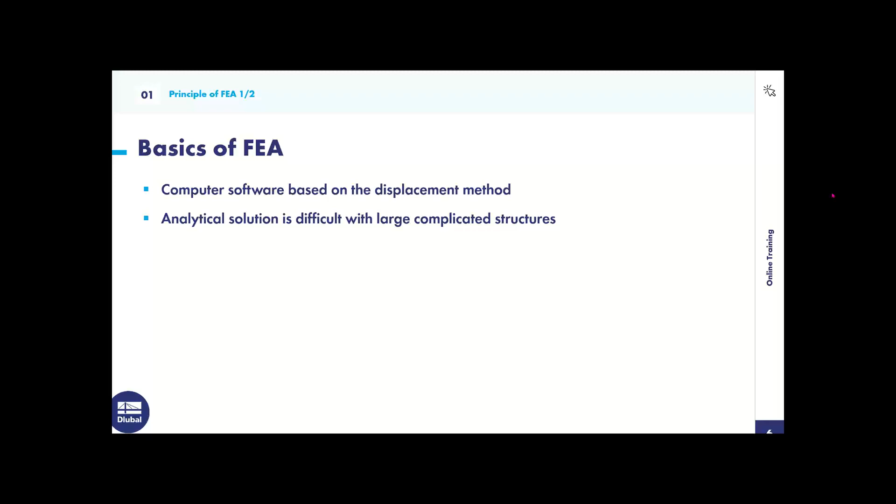So the structure within an FEA is converted to a finite interconnected element mesh, and then the material and cross-section properties are given at each finite element node. Once that's done, the mechanical behavior is transferred between these elements. A word I'd like you to walk away with is discretization. This is where the structure is being submeshed into finite elements.

So now we can go through the FEA calculation workflow. First, the local element stiffness relations are determined. Then the program changes the stiffness relation at each node to the global coordinate system. Then the entire structure is assembled. Fourth, the support conditions are implemented into the structure. Then the displacement vectors are determined. And lastly, the support forces and internal forces are determined.

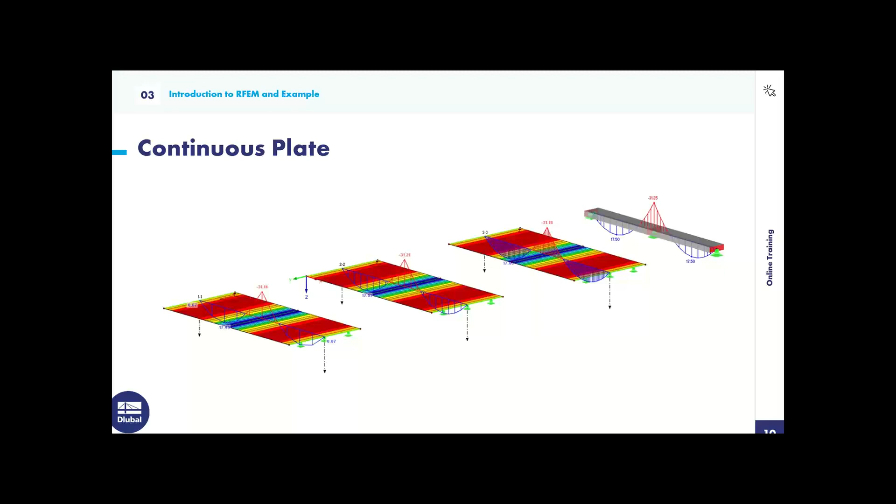So now I will just move into RFEM. One second. And now you should see RFEM. And right now I have an example up, and with this example, I will just be using this so we can go over the UI of RFEM and just the basics like tools and everything.

So to start off, RFEM is a structural analysis software capable of analyzing plates, members, and solids. Deformation, stresses, and internal forces can then be calculated for a 3D structure. So just to go over again the basic UI, the panel on the left-hand side here is called the project navigator, and this is very important for model data, and this includes all of your model data, everything that's modeled within your structure.

And for example, within this project navigator, you can expand and collapse all of these folders, such as members, and within these folders we have each member listed. This can also be done for nodes, lines, and materials, etc. And you can see when I click on any member within this expanded folder that this is synced up with your graphics window on the right-hand side here. So if you ever need to find anything, you can do it easily with that.

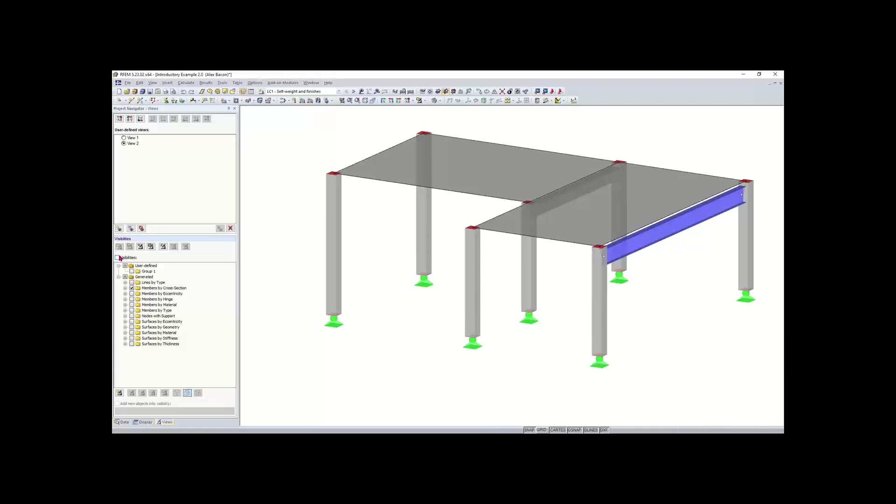Our last tab here is our views tab. So within our views tab, we can create visibilities based on these options down here. So if we turn on visibilities, we can create visibilities based on member cross-sections. So right now, if I only wanted to show my W18x50 here, I could do that. Maybe I only want to show my rectangular columns here or rectangular cross sections, my 12 by 12s. We can do that as well. And then you can also save visibilities and pull them up whenever you'd like.

The third tab we would have is our results tab. So if I just run the results for this model quickly, then we will see our results tab, and that will pop up at the bottom here only if we have results ran. So I just ran my load combination 1, and if I turn off my visibilities, now you can see in my results tab, this is again similar to the other menus where we have our expanding and collapsing folders. So right now I have global deformations checked off, and we're viewing our resultant deformations. And you can see we get a nice look at that.

And then we can also check out our member basic internal forces, as well as our basic internal forces for our surfaces, if we would like. But we'll go over more of this in detail later, so don't feel too rushed to learn this real quick. We will be going over all of this in the training. But just want to give a basic overview.

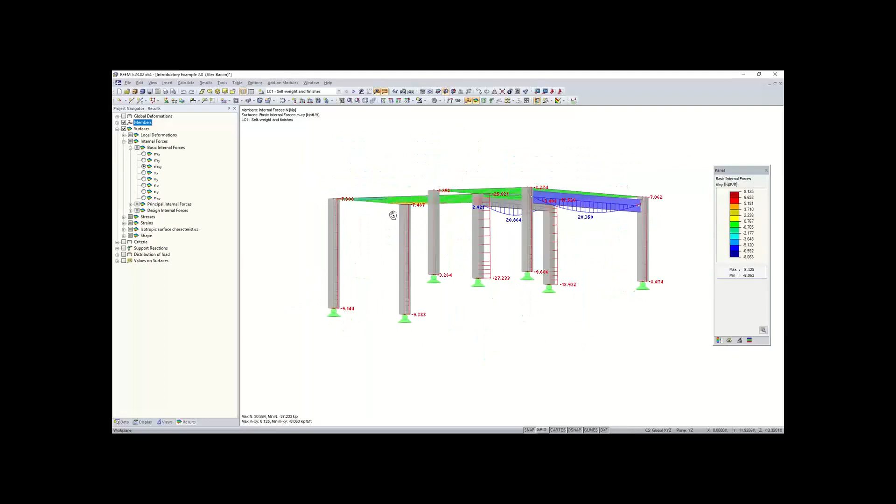Also, controls, very important. So if you like to interact with your model, if you have a scroll wheel on your mouse, you can zoom in and out with the scroll wheel. Clicking down the mouse scroll wheel will let you move the model in translation. And then holding control and clicking down the scroll wheel at the same time will allow you to rotate your model. If you don't have a scroll wheel on your mouse for some reason, you can use the arrow keys on your keyboard to move the model around in translation. You can also hold control and use the arrow keys to rotate the model as well. And then if you want to zoom in and out with the keyboard, you can use the plus and minus buttons as well.

One more thing before we get into modeling, I would like to just go over highlighting. So real quick, if you highlight from right to left, this will give you a purple box, meaning that anything that touches this purple box will be highlighted and selected. Highlighting from left to right, only things that are fully engulfed into this red box will be selected. So that's the difference between the two highlighting boxes.

So now, before we go into it, I can go back to the PowerPoint. And I just have another question to ask before we get into the model. So the question is, what is RFEM? And then the options from A to C are listed. So if you could just answer that, and I'll give you about 30 seconds to a minute.

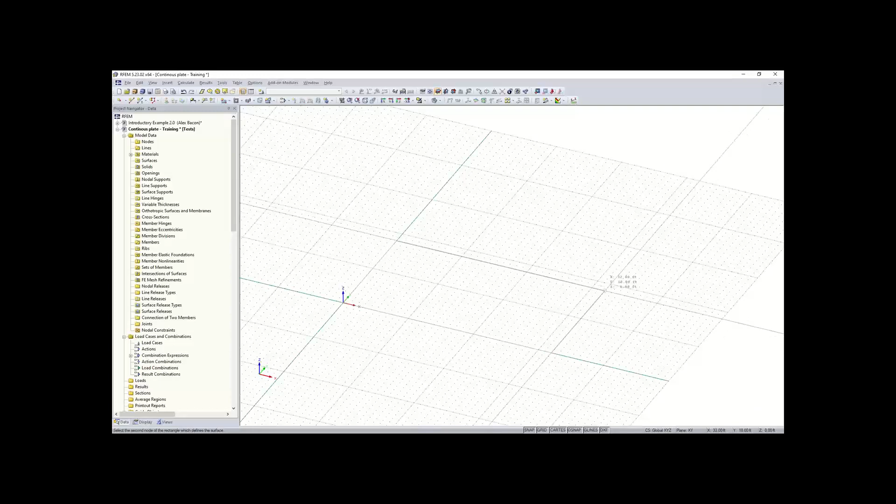Now you'll see that my cursor will turn into a reticle. And what I can do is I can just left click anywhere within this grid. You can see that the reticle snaps to these grid points here. And I can click, and then I can draw this surface here. And this surface is going to be 32 feet by 16 feet. So I'll go 32 feet in the X direction, and then 16 in the Y direction. And then I can just click, and you can see that this surface has now been created.

One thing I did want to change, so if you need to edit your surface at all, or anything that you place within RFEM, you can easily edit it by right-clicking on it and going to edit, or you can also just double-click on it. So I do need to change the thickness of this plate to 12 inches. So I can easily just do that by simply double-clicking on it, and you can also see you can change your material and other things as well. So I'll click OK.

And now we can create the same plate again above this original plate. I can just go up here to my rectangular surface tool again. I can click OK. And now I'm going to model a second plate 5 feet above this one. And then I can click and just drag my cursor, make sure that this is 16 feet wide. So that will be right there. So now we have our two plates here modeled within the XY plane. We'll go over work planes later in the training.

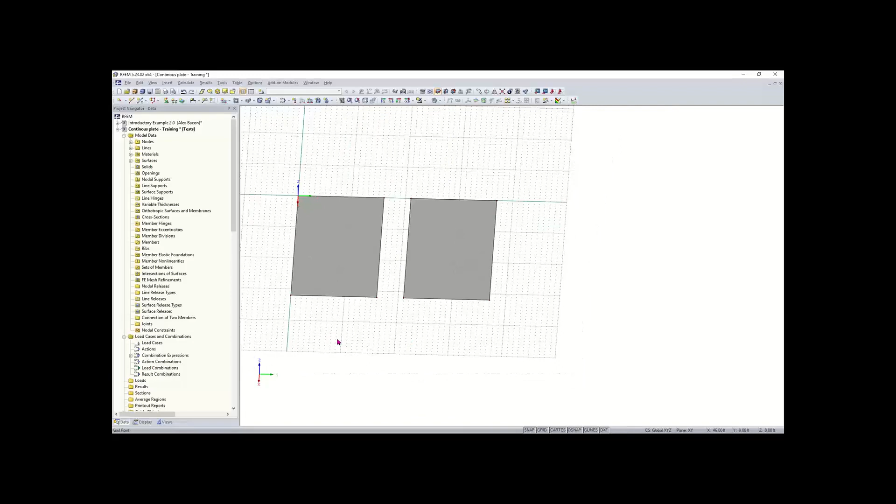So then we can simply create a third plate pretty easily. And to do this, we can use our move and copy tool. So what I can do is I can rotate here, and I can simply just highlight the second plate, and I can right click on it, and I can click move/copy. And what this will allow me to do is I can make a copy of this plate and then just move it wherever I would like using displacement vectors here. What I'm going to do is use this select 2 points and return, and this will give me a displacement vector by selecting the 2 points graphically.

So now I can just simply create one copy of this plate, and then I can create a displacement vector graphically, and I'll select my bottom corner here, and I would like this copy to be 5 feet above this plate. So I'll click that, and I'll click OK. And now you can see that the copy was made, and it was made based on that displacement vector that I selected.

So the next thing we want to do is now we can create our continuous beam. And to do that, basically we're just going to be creating our member. And you'll see that my plate is hanging off the edge of my grid. So to change the amount of grid points that you have, or to expand this grid, we can simply go up here to our tool. It's not really a tool, but our settings for our work plane. We can click on this.

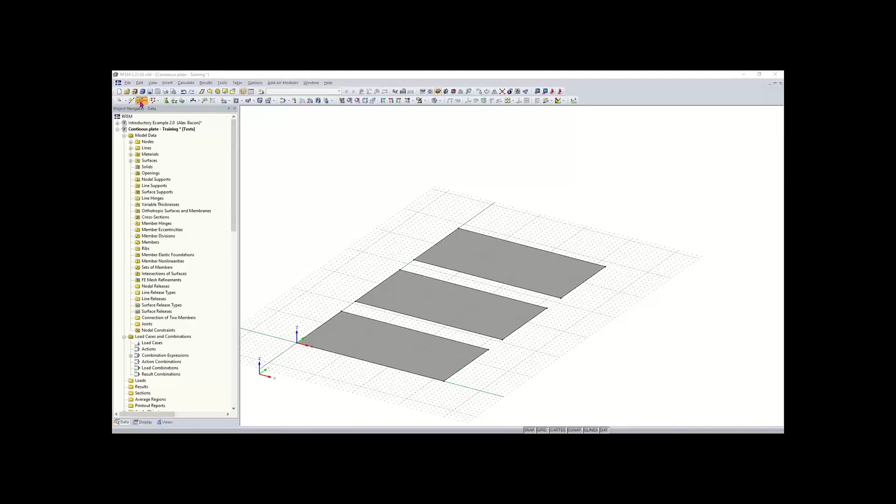And then once we click on that, we have our new member dialog box here. And we have basically a lot of information, but the one thing to focus on is just to input what our cross-section is going to look like. So we can just go over here to this button called Import from Cross-Section Library. We'll click on that.

And then this is similar to the material library, but you can see that we have our cross-sections here. We have rolled, built-up cross-sections, parametric thin-walled, parametric massive, and parametric timber cross-sections, as well as some other options down here as well. Right now, we'll just be focusing on our rolled I-sections here. Actually, my mistake. We will not be using the rolled I-sections. We're going to be using the rectangular parametric massive sections right here. So we'll click on that.

And then once I click on that, you can see that I can enter the parameters for my cross-section, like the dimensions. So I can enter what the base is going to be, which is going to be 40 inches. And then my height is going to be 12 inches. And now you can also see down here that our material is by default set to 4,000 PSI concrete. So it's also per the older ACI standard. So what I can do is click on edit, and then I can go and change it to the newest standard, change it to 4,000 PSI concrete, and everything is correct there.

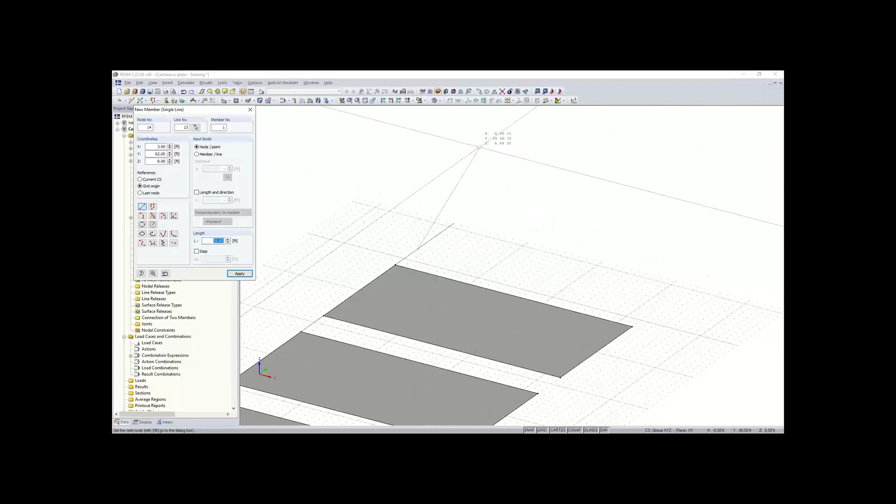And I'm going to add this beam 5 feet away from my third plate here. So I'll left click, and now you can see that I can just draw, you see this line here, I can draw my beam, and it's going to span the same length as our plates here. So I'll left click again, and now you can see that our beam has been drawn. And now we have our 3 plates in our continuous beam right here.

So the next thing we want to do is we want to divide these lines here on the edge of our plates, so we can add a midspan here for supports. We also want to divide this continuous beam, so we can add a middle support as well. So to divide the lines, we can simply just right-click on the line. And again, when you right-click anywhere or on any object, you get this shortcuts menu. So we can just right-click on this line to divide it. And then we want to go up here to divide line.

And you can see under divide line, we have multiple options for dividing a line. So we can do it by distance. And you can see when I pick that divide line option, we have these gray arrows here on your lines. And these arrows tell you the orientation of the line or the direction that you drew the line. So this would be the start, and this would be the end of the line. You can also view these arrows by just hovering over any line that you've drawn.

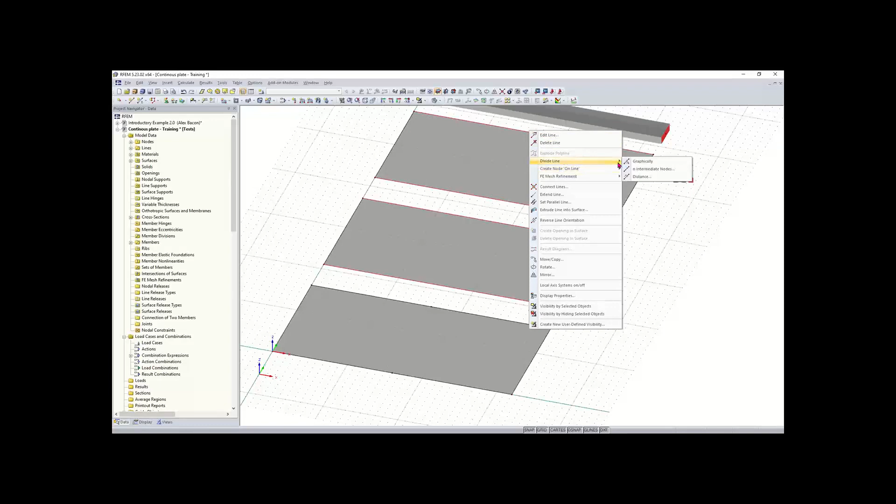Now we can do this for the rest of the lines, and we can easily just hold Control to select the rest of these lines. Right click. Holding Control while selecting options allows you to select multiple options, and we can do this by distance again. Everything's set here, you can see the multiple lines have been selected. I'll click OK, and now we have these nodes placed in the middle of our lines.

Now we'd like to divide our continuous beam up here. I can right click on the beam, go to divide member, and the first option would be graphically, which lets you select graphically where you'd like to place the node. I'm going to place it right in the middle here at 16, and now you can see that our member has been divided.

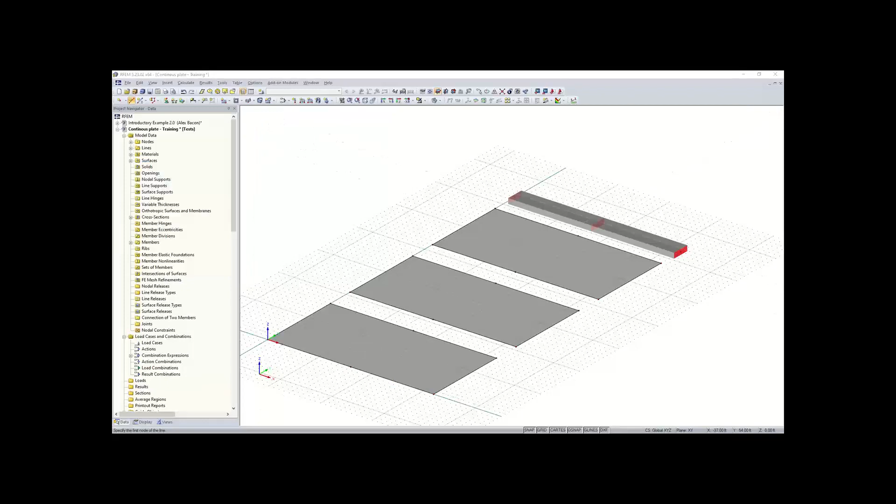I'll rotate the model to get a better view. Now that our members and lines have been divided, we can draw a line down the middle of our plates. The reason we're putting this line down is to later add a line support there, so we have some mid-span support. Let me go back - we have an option up here called New Line, right next to our New Single Member button.

I'm just going to click that. Now you can see this box opens up, and what we can do is draw our line within our work plane. I'll select snap to and select this first node here, then draw it and snap to the second node. You can see we have a nice perpendicular symbol there, letting me know the line is perpendicular. I can right click anywhere or hit escape to exit out of that tool, and now you can see that our line was drawn.

Now that this line has been placed, instead of having to redraw it, we can simply click on it and hold Control. If I click on something, hold Control, and then drag it, that'll make a copy of it. This is a great workflow for working with anything in RFEM - you can simply highlight something, hold Control, make a copy of it, and drag it and snap it anywhere. It's pretty efficient.

Now we can add in the nodal and line supports. First off, we'll add our line supports for our plates here. To do that, we can go up to New Line Support. This line support is going to have certain conditions to it, so what we can do is click on this button called Create New Line Support.

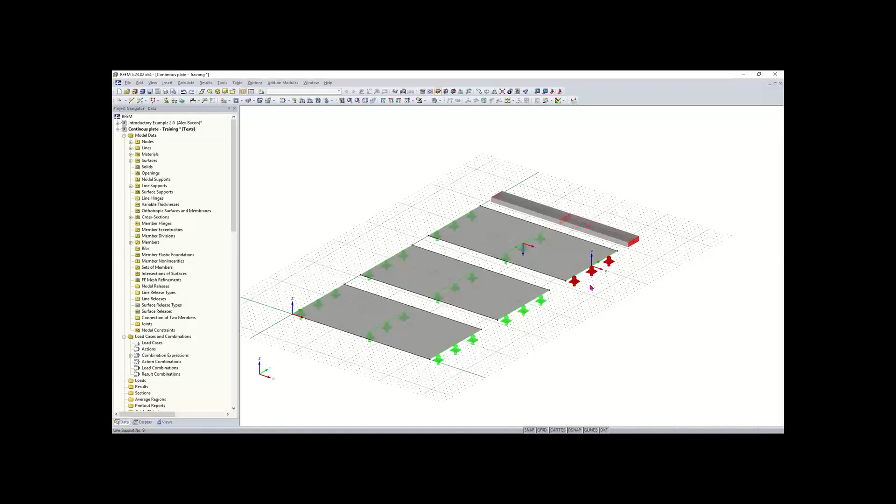Now we just need to add nodal supports to our beam. We added line supports to our plates, now we want to add just nodal supports. To do that, we can go up to New Nodal Support, and you can see by default that hinged is already selected here, so instead of having to create a new nodal support type, we have hinge selected already. We can hit OK.

Now we can select our first end node here, and then select our middle support. This last end support is going to have different conditions than these two supports, so we can go up to nodal support and create a new type of support. This support will be the same as a hinge support, but the rotation about the local x-axis will be restrained. I'll click OK again, and now you can see that support is a little different - it can't rotate about the x-axis, so it's locked. Now all of our supports are defined.

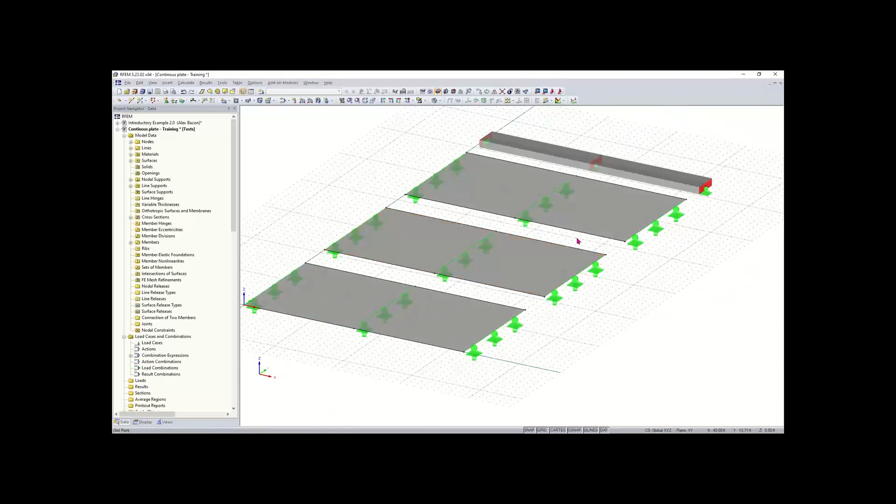So now that our supports are defined, we can get into loading. So now we would like to load these plates in this continuous beam.

It's important that we create a new load case because every load within RFEM needs to be assigned to a load case. I can go up to edit load cases and combinations, or use the New Load Case button. I'm going to click on the New Load Case button. You can see the program has automatically created a new load case for me already.

For this load case, you can add a description, and I'll just call it dead load. You can see the action category is set to dead—we don't need to worry too much about that right now. But here you can see we have an option for activating or deactivating self-weight. For this example, I'm going to deactivate self-weight. Now our load case has been defined, and we can click OK.

Now you can see up here we have our drop down telling us which load case we're under, and load cases and combinations were automatically generated based off of standards. The program has generated some load combinations and result combinations, but we don't need to worry about that right now. We just want to stay under the dead load so we can add loading to these plates and continuous beam.

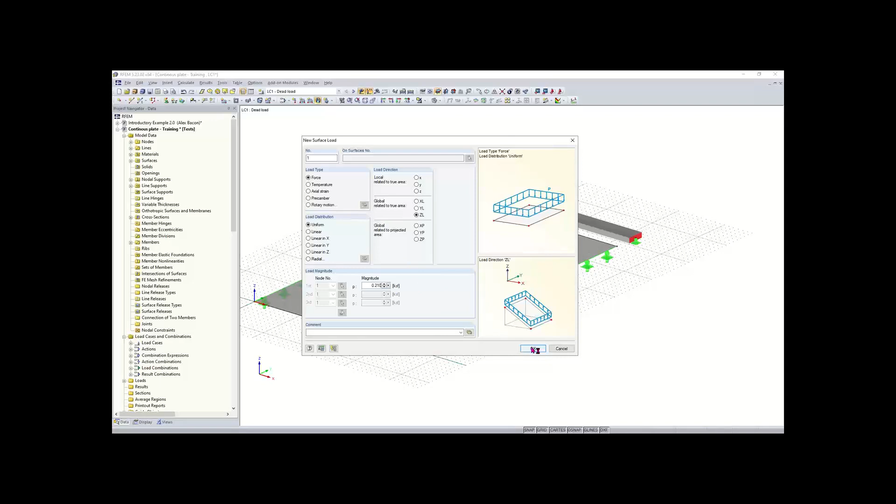Once I click OK, you can see that my cursor has changed, allowing me to select surfaces within my model. Once I click on a surface, you can see those loads are being generated onto the surface. You can also notice that my loads are pointed up in the positive Z direction.

I would like those to point down, so what I can do is simply highlight them and double click on them. Then I can add a negative sign in front of my magnitude here. Once I click OK, you can see that the loads will be shifted, or swapped.

Next we want to add a uniform load to our continuous beam here. Again, up with our tools, I want to choose a new member load. Keep in mind the member load tool is for members only, and the new line load tool you want to use only for lines, when applying loads to the perimeters of surfaces, for example. So we'll choose new member load.

Again, this is similar to the surface load, where we will have a force as the load type. This load distribution is going to be uniform, and the load direction, again, is going to be in the global Z direction.

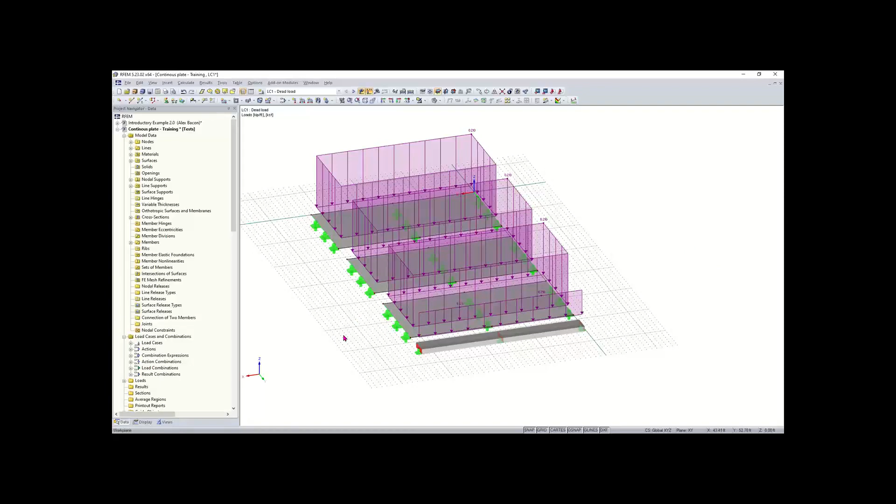If you've drawn your loads and you want to edit them, you can simply double click on them. If you double click on one, that allows you to edit just that one load. Also, if you need to highlight all of your loads or a couple at a time, you can highlight them and then double click, and that will allow you to edit them.

Great, thanks. You're welcome. Now that we have our loading, we can move on to creating FE mesh refinements. Within the program, for surface elements an FE mesh is generated, and right now our FE mesh is set to about 1 foot for the length of our finite elements. We'll get into more detail on that later if you're a little confused.

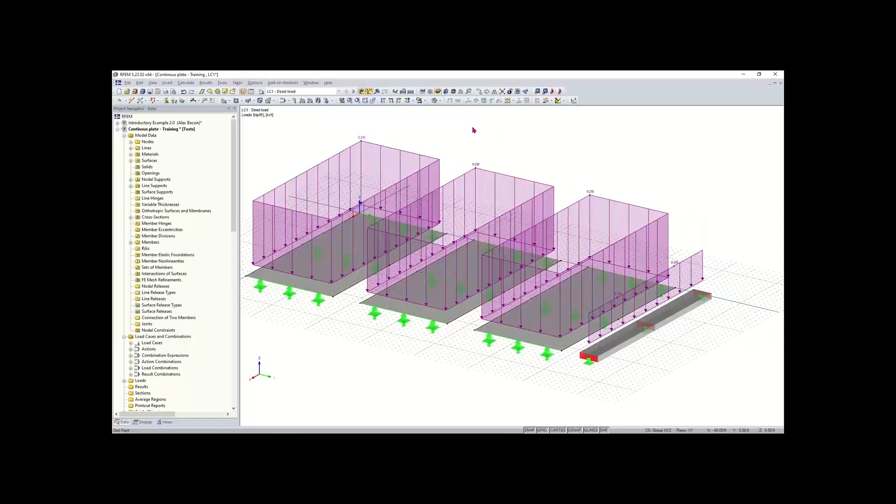For now, we'd just like to add an FE mesh refinement, which allows us to change how fine our FE mesh is going to be for individual surfaces. To do this, I can right click on my surface here, go to FE mesh refinement, and then click on new. I'll create a new FE mesh refinement using this button called create new FE mesh refinement. You can see surface 1 is selected, so I'll click on that.

Right now we just have surface selected, automatically done by the program, and we can set our target FE mesh length. I want to set mine to 0.2 feet. This is smaller than the 1 foot default selected globally in the program, so I'll click OK, then OK again. Now you can see this icon here telling us that an FE mesh has been applied.

Now we want to do the same thing for our other two surfaces. We can right click on the surface and add one, but we can also go into our project navigator on the left hand side, scroll down to FE mesh refinements, and expand that. You can see we have one for surface 1. I can right click on FE mesh refinements and click new FE mesh refinement.

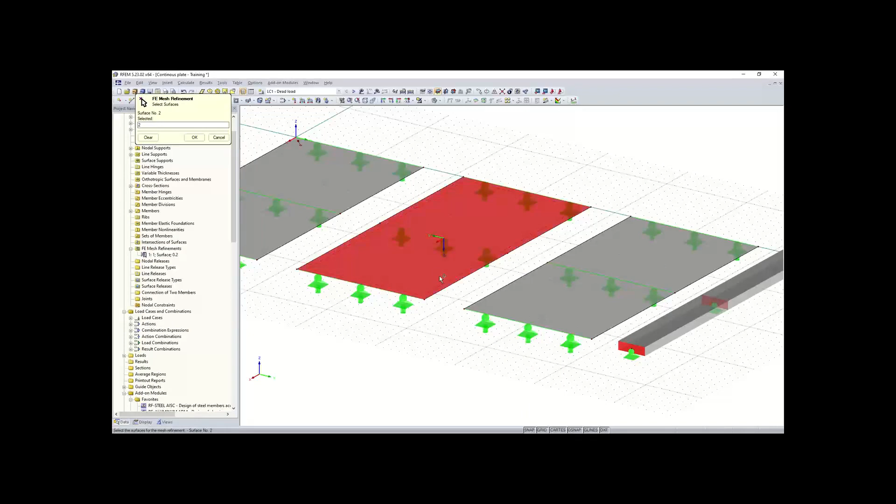For this surface, I just want to increase the FE mesh refinement so we can get an idea and compare results later to see how results change depending on FE mesh length. I'll click OK, and again we get that icon. Then I'll do the same for this third surface - right click on it, create a new FE mesh refinement, and make this 0.6 feet, so you'll see they'll be increasing down the line. I'll click OK again, and you can see that icon has been placed there.

We have another quick question unrelated to the FE mesh, which maybe you can address quickly. One of the attendees noticed that you selected concrete for one of the materials. They're wondering, what does the RF concrete add-on module do then? How is the add-on module different, I suppose, from RFEM?

So basically the material for concrete has been selected with RFEM here. You'll see later on when I run results that in RFEM you just get things like global deformations, internal forces, support reactions, etc. But if you want to design rebar for your slab here for reinforcement, that's when RF concrete members or RF concrete surfaces would come in. We have two different modules, one for surfaces and one for members. So basically the add-on module is for designing the reinforcement.

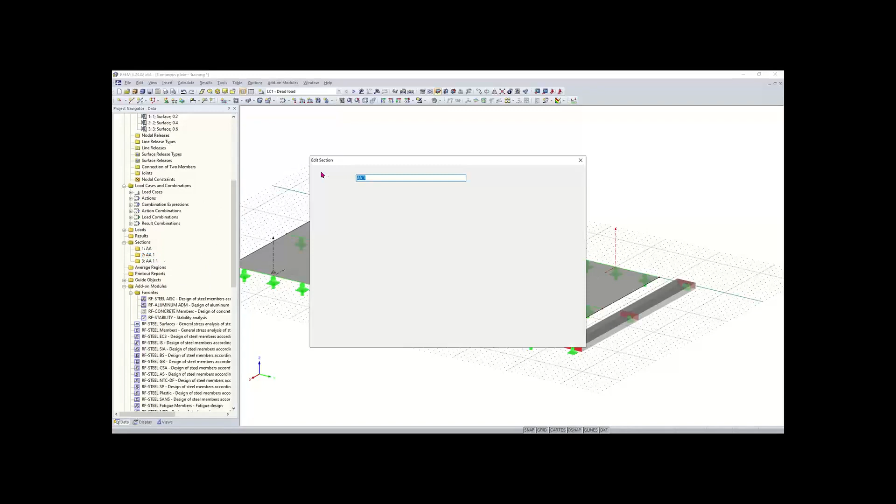You can change the section name if you do that within the project navigator by going over here to sections, and then you can simply edit a section and rename it. I'll make this one AC, and then my other section will be AB. Yeah, so click OK, and now everything is basically ready for calculation.

So we have our surfaces and members along with our supports and loading. So again, you can turn off the loading, like I don't have mine shown right now, but you can turn on and off the loading up here with this button. I'll turn it off for now. And now we can go up here to our toolbar and we can click on this button called Calculate All.

So once we hit Calculate All, the program will go through and run the calculations. It should only take about a minute or two. It all depends on the size of your model and the complexities. And then once this runs, the first thing we should see is our global deformations, and those should be shown. And then we can get an idea of our internal forces and things like support reactions. So now you can see that we have our global deformation shown right now.

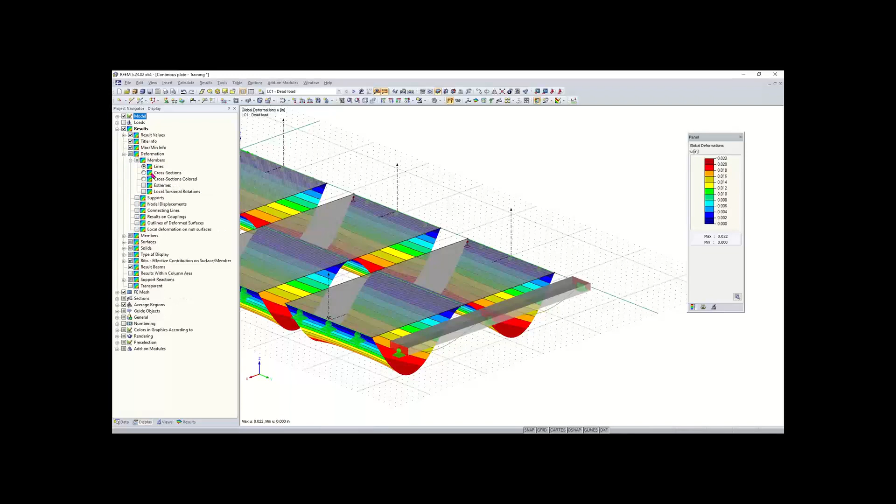But if we wanted to have a colored cross-section for this deformation, we could go to Display, and then we could go to Results, Deformations, Members, and we could select cross-sections colored. So now we get a nice color section here. We can also take a look at our member internal forces. So I can check member, and now I can just look at my axial forces. Right now we don't have any. I can get a look at our moments, and we can get a nice moment diagram there.

And we can also take a look at our internal forces of our surfaces. So we can view the basic internal moments along the x-axis. And again, like I said, every element has a local axis, and this is referred to with the lowercase coordinate here.

So if I hover over any element, it'll give me the local axes for the plate. Also, if we want to see the local axes of our member here, we can right click on that and click on local axes, and now we will get that for all of our elements here. So I can right click again.

Quick question. One of the attendees is asking how to find the optimal mesh for the analysis. Yeah, okay. So the optimal FE mesh for analysis, it's a little tricky. There's not an actual specific length that you would pick for your FE mesh for a certain model. So basically what you can do is adjust the FE mesh by going up here to calculate, and you can go to FE mesh settings.

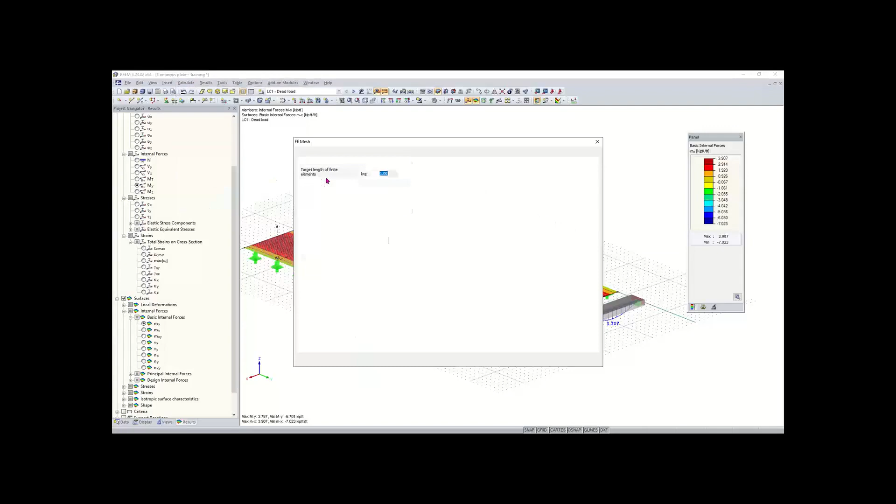And this is the global FE mesh settings for your model. And here we have our target length of finite elements, and you can change this. So basically finding the correct FE mesh is just a guess and check. You can take a look graphically if you zoom into your model at the FE mesh and just make sure it looks good.

But then also you can run the results of your model with a certain FE mesh length, and then you can change the FE mesh length or make it finer, and then run your results again and compare those results and see how much they've changed. And you can just keep doing that until your results don't change, or the difference between your results is small.

Yeah, I think exactly as Alex had mentioned, it's basically just running a trial type process where you continue to decrease the FE mesh. If your results are changing significantly, then you know your FE mesh is not refined enough. The other thing I wanted to point out, Alex, if you can go to calculate, FE mesh settings again. The third tab is called adaptive mesh refinement.

This is something that we're not going to get into today, but essentially the program will run that testing process for you. So here you can set the number of iterations, the load case or combination to consider, and the program will run a quick analysis in the background, check the results, and then it will refine the FE mesh in certain areas of the model, and it will essentially create the FE mesh that is optimal for your model. So this is a way to automatically do it. To manually do it is exactly as Alex had mentioned.

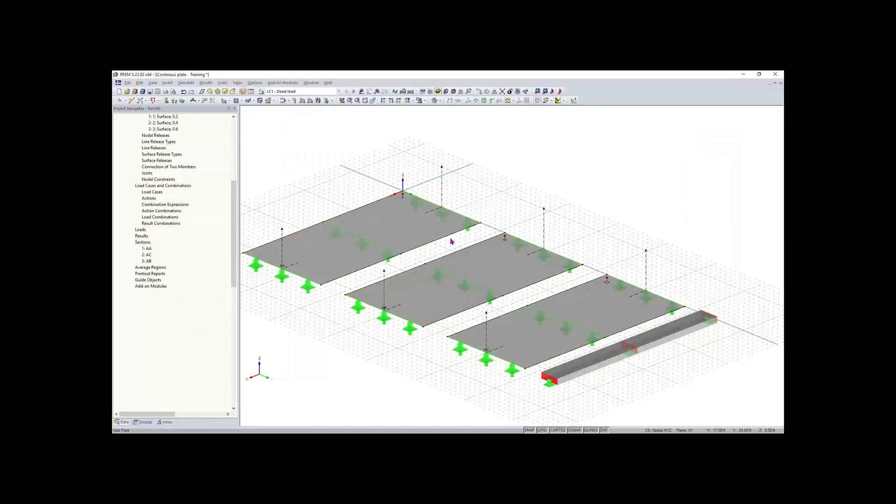So once this is done, we will have to click OK, and it's going to say that this action is going to require me to delete my results. Do I want to continue? I'll hit yes. And now I can rotate my model again. And once I've done that, it's going to make me recalculate.

And once I recalculate, you'll see that the results are going to change just a little bit, mostly the bending moments, because instead of RFEM taking into consideration shear stiffness, it's just going to assume an infinite rigid stiffness for the shear. And I'll get into that in a little bit.

So basically, this is because the methods used in school assume an infinite shear stiffness, when in reality there are some shear deformations for bending. So just keep this in mind when comparing hand calculations of deformations with RFEM.

So now back to the PowerPoint, we can go over some plate theory. So let's go over the plate theory. These first theories are going to be analogies for beam elements. The first theory is Bernoulli's, and the second theory is the Timoshenko theory.

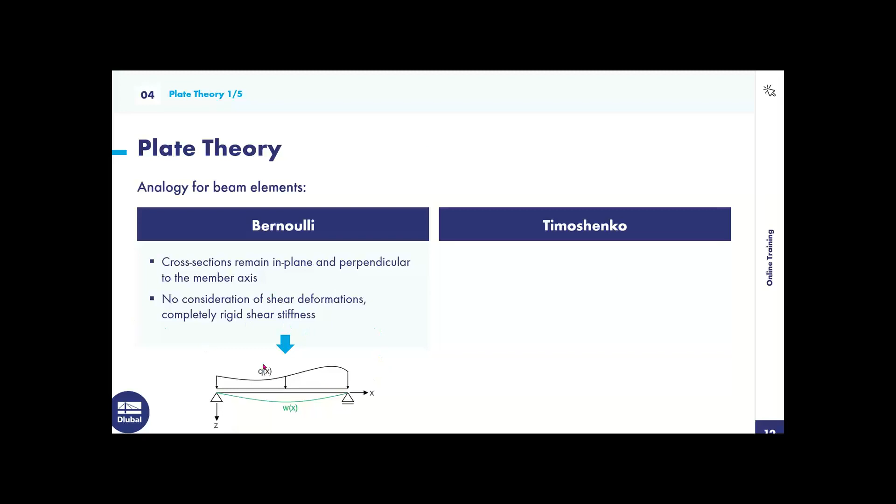The assumptions made for Bernoulli's are that the cross sections always remain in plane and are perpendicular to the member axes. The second assumption is that there is no consideration of shear deformations, and that the shear stiffness is completely rigid for our member.

With the Timoshenko theory, similar to Bernoulli's, we assume that the cross sections remain in plane and are perpendicular to the member axes. But we assume that the shear deformations are taken into consideration and shear stiffness is limited and isn't completely rigid. So this is the more realistic theory, and this is the one that you might use in school.

So now I just want to show a graphic to represent what I just mentioned. Here you have Bernoulli's, and you can see the deformation is perpendicular to the member axes. And for the Timoshenko theory, we have an additional angle, and that comes with additional deformation, due to the additional shear deformations or shear stiffness that is taken into consideration.

So these two theories we can apply to plate theories. As an equivalent analogy for plate elements, we have the Kirchhoff theory and the Reissner-Mindlin theory. The assumptions for Kirchhoff are similar to Bernoulli's theory, but for plates. And the theory similar to the Timoshenko theory is the Reissner-Mindlin.

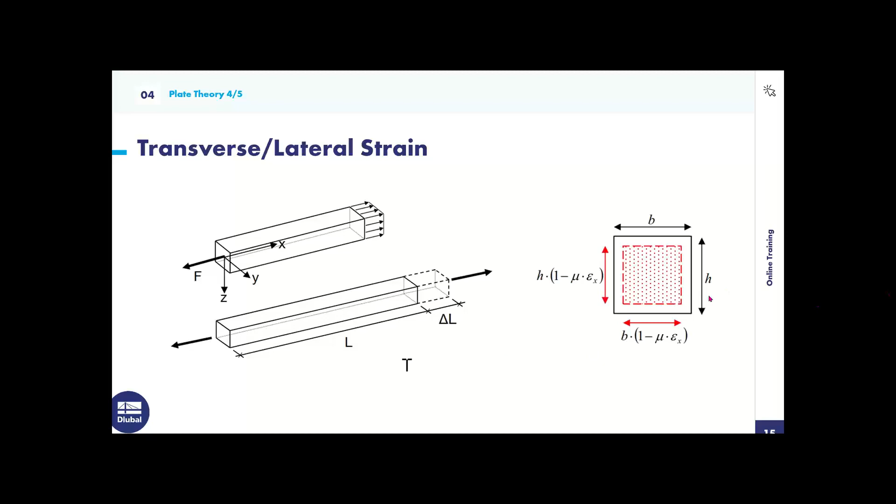So basically, the factor mu here is what takes this into consideration for our height and width. And just to summarize, for the Kirchhoff theory and Reissner-Mindlin theory, Kirchhoff normally yields great results when very thin plates are used, for example, concrete slabs. You also have to keep in mind that this only considers pure bending load-bearing capacity, and this is just basically a simplified

approach. For Reissner-Mindlin theory, the considerations for shear deformations are there, and this is better for thick plates, and also shear influence from components is relatively high. There's also a significant error when neglecting shear forces, and this is just better for more accurate shear forces and is a higher value approach. In my opinion, the Reissner-Mindlin theory is what you should be using most of the time, but I just think it's good to know the difference between these two theories.

So now what we can do is move back to the program. Within the program, we can go to calculation parameters. And once we open up calculation parameters, you will see that under options here, the plate bending theory is by default set to Mindlin. So this theory, like I said in the PowerPoint, takes into consideration shear deformations. So we can just keep that the same, or we can also change it and get a view of how the results change.

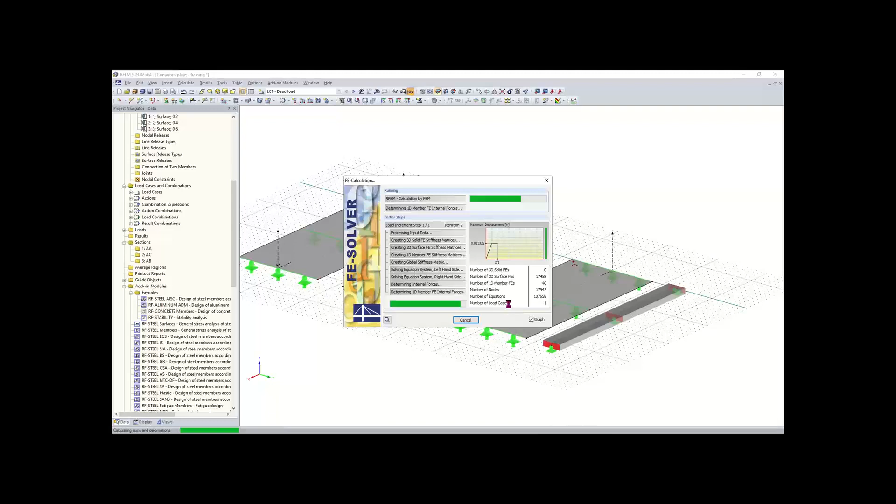Alex, we have a quick question. Yeah, maybe while we're waiting for this calculation to run. Okay. We have a user that says, is it possible to change the units of the values in the results? Yeah, it is. So that's something I should have mentioned in the beginning. You can change the units of your results, and the units in general, by going up here to options, then to units and decimal places, and this dialog box will pop up, and within here you can change the units of pretty much any result.

So up here you have tabs and you can go to results, and then here you have deformations. You can change the units of your internal forces here. You have a drop down, you can change between any of these units if you like. You can also change your decimal places as well. And if you want to change between imperial and metric, you can do that at any time throughout your modeling as well.

So those results ran, and maybe you can remember a little bit from the results before, but you can see that they've changed slightly, maybe by 0.1 or 0.2 kip per feet.

And so now that we ran that, we can also move on to another question. I'm going to go back to the PowerPoint, and I would just like to give a quick question. One second. So now this question should pop up in the PowerPoint. You can enter your answer in the chat. And I'll again give another 30 seconds to a minute for that.

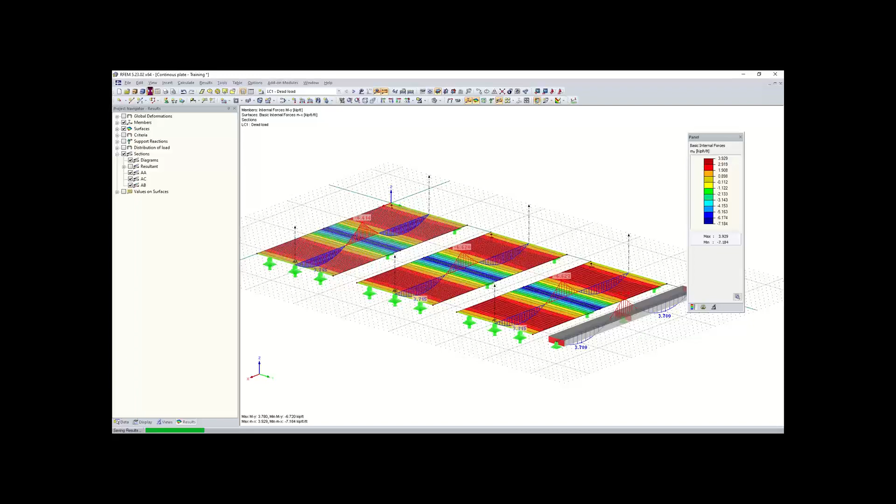So what we can do is we can open up a new model. We can also save our model for our continuous plate by hitting the Save Model button up here. And that'll save our model. And now what I can do is I can click on New Model.

And within this new model general data tab, like I said before, we can just type in our model name. So I'll just name this one Euler case 1 example training. We don't have to add a description. We don't really need to generate combinations automatically. So it'll also be a 3D model, and everything here is set by default, so that's good. So we'll click OK. And now we have our blank workspace here.

So what we're going to do is just create one single member, and this is just going to have a new cross section. So what I can do is go up here to new single member. I can click on that, and now I can create my cross section here again. So I can go to import from cross section library. And then it's going to be an I section. So I'm going to click on I section.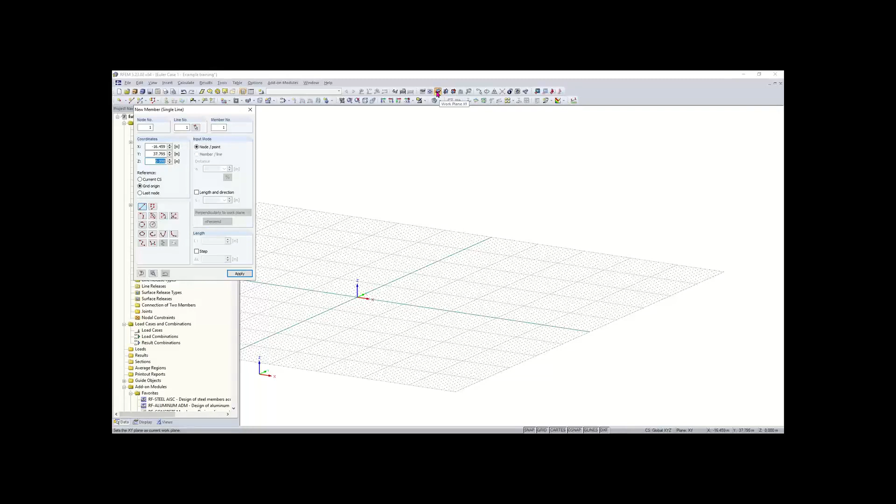And now I can draw my member. So maybe I want to draw my member perpendicular to this grid here. What I can do is I can check off this box here called length and direction, and I can set this perpendicular to work plane if I want to draw it perpendicularly. Or what I can also do is just change my work plane up here using these buttons. So right now it's set to work plane in the X and Y plane. I can change my work plane to the YZ plane, or I can change it to the XZ plane.

I'll keep it on the XZ plane, and now I can just select my origin here by left clicking, and I want this column to be 30 feet high. So what I can do is simply just go up here, left click, and now my column has been drawn. I can right click to cancel out of this, and now our column has been drawn.

So now the next thing we want to do is just add in a rigid support. So I can highlight from left to right this node here. I can go up to nodal support, and right now it's set to hinged. Instead of having to define a rigid support, what I can do is just hit this drop down and select rigid, and you can see that all of the degrees of freedom here from translation and rotation are all fixed with these check marks. So now I can click OK, and I can zoom in here and you can see that my rigid support has been added.

And now our Euler case 1 has been created. And what I can do is create a new load case for it. So because I need to add in loading, I can go up here to new load case.

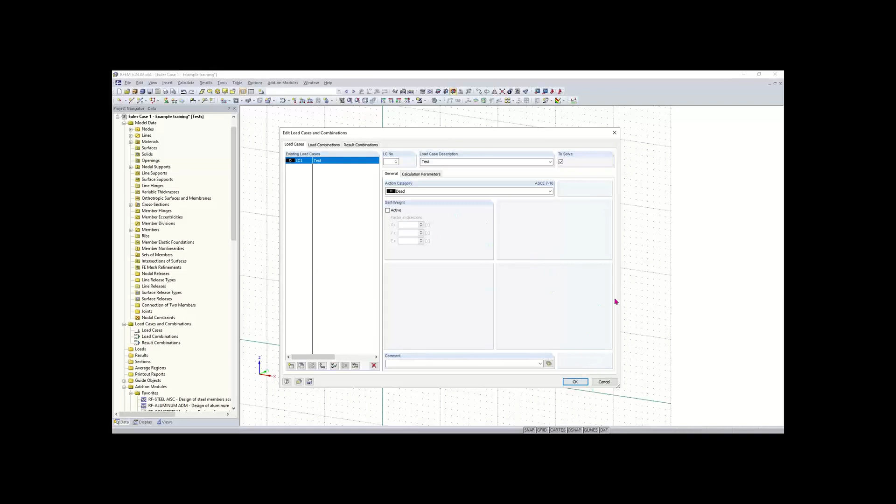I can just name this load case test, and the action category is set to dead. Again, we're going to deactivate self-weight just for hand calc reasons. Normally you want to keep self-weight activated at all times for design. So we'll click OK.

Now we can create our new nodal load. To add a nodal load instead of a member load or surface load, we have a button here called new nodal load. We can click on that.

This box should look pretty simple. We have our node selected up here, and then we just want to tell the program the force and what direction it's going to be in. It also looks like I'm still in metric, I have kilonewtons, so let's change that down here in this units button at the bottom.

I'm going to just change this back to imperial. I'll click OK. Oh, it's asking me. Yep.

For this load, we're going to add in a -5 kips in the z direction. You can see that loading has been shown here in the graphic. And then also I want a lateral load in the x direction of 2 kips. So we'll add that. We'll click OK.

It looks like I had my node down here selected before I went into my tool up here. So what I can do is double click on this loading and change the node. Or I cannot change the node there, so what I can do is just drag this loading to this top node here, and there we go.

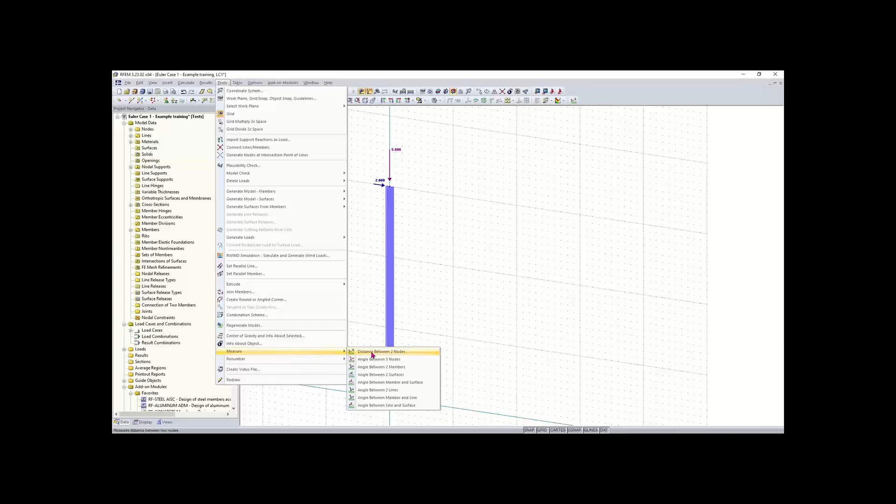Now that our loading is on the top of our column, I also want to make sure that my column is still 30 feet tall. So what I can do is go up to Tools, and I can go to Measure, Distance between 2 nodes. I can click on these 2 nodes. Yep, so it's 30 feet tall.

I'll click OK. And now, so yeah, now what I want to show you is something important. This is very important for calculations of structures within RFEM. What I can do is click on Calculate All, and I can run the calculation for this column.

Now you'll see that my deformation is shown here, my resultant deformation. I can also go here to member and again show my internal forces. I can show my moment about the local y-axis here. I can get an elevation view of that.

So also when you look at, we can take a look at our deformation in the x direction, 3.782 inches. And now I just want to show you how this linear or first order calculation differs from a second order calculation.

Just to clarify on that, if I go to edit load cases/combinations, and we're looking at this load case that we've just put loading on and created, if I go over here to my calculation parameters, you can see we get our method of analysis right here. Generally, load cases are calculated based on a first order analysis, and load combinations, which we didn't get into, are calculated based on a second order analysis.

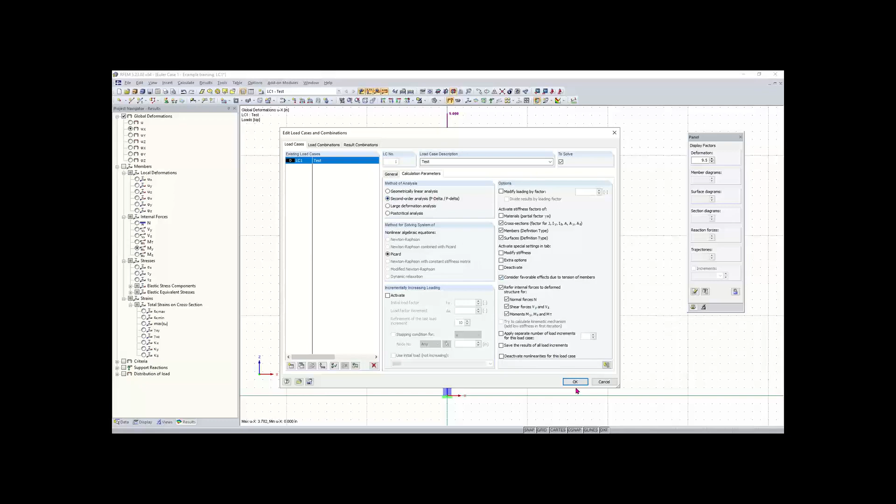So basically, a first order analysis defines the equilibrium of the beam based on the undeformed system. And the second order analysis bases the equilibrium on the deformed system, so that the deformation and bending moment is going to be increased because of the larger deformation.

So if I do that and then I click on calculate all, you should see that the deformation has increased from 3.7 to 3.9 inches. And also our moment here at the bottom has increased from about 60 kip feet to 61.6 kip feet. This is because of the P delta effect. Since the deformation has increased, the applied axial load has an increased moment arm, giving us a larger moment here.

Keep in mind you will get two different results with these different analyses. One note also, members in RFEM, like this one, are determined to be a beam or column internally based on how the loads are applied. In this case, we have a column because the majority of the forces applied are axial.

Let's quickly go over member types. If I double click on my member here, you can see the member type is set to beam, which takes into account beam or column. We also have rigid for infinitely rigid stiffnesses, and we have ribs and truss members, but we won't get into those types today - just good to know. If you're designing or drawing a beam or column, always keep the member type as beam.

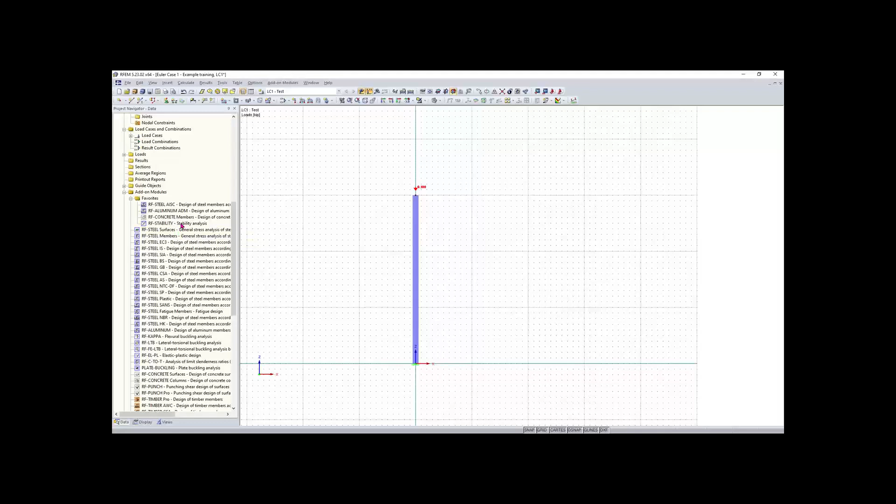Now that I decreased the loading on our column, we can go into our RF stability add-on module, which all students have access to. I can go down here to add-on modules - you'll probably have a long list, and I've favorited the ones I use most frequently. If you're having trouble finding the RF stability analysis add-on module, go to add-on modules, then others, then stability, then RF stability.

All of the add-on modules look pretty similar to this - basically just a dialog box. Within this dialog box, it takes all the data from RFEM, such as materials, cross-sections, members, everything - you don't have to worry about redrawing or modeling anything. This add-on module, RF stability, is very useful. RF stability uses eigenvalues and different eigenforms to perform a stability analysis - just some background information.

Euler was a mathematician who came up with different cases to show the critical factor along with the critical load and lengths for a structure - this is something every stability analysis does. In order to get the different buckling cases, I'll simply deactivate the minimum initial pre-stress for cables and members. It's also important that we activate the division for straight members, which is already checked by default, so I'll keep that checked.

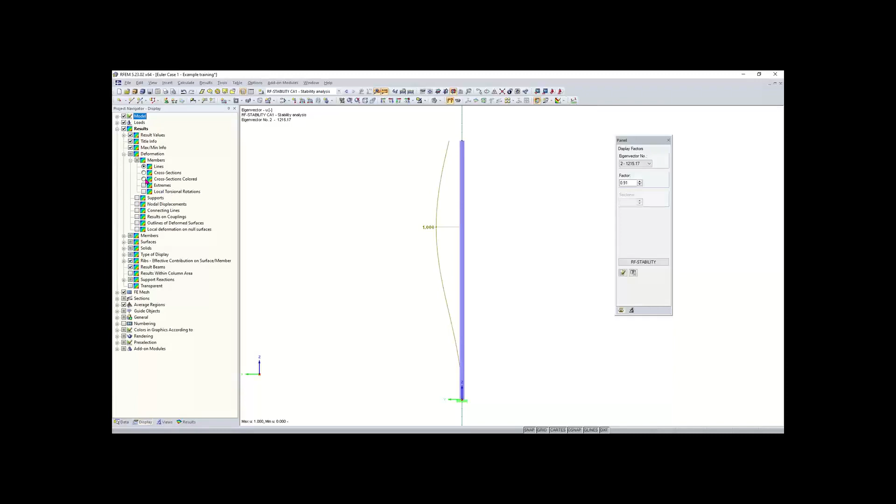And what I can also do is go to display, select color cross sections, and this gives you a better idea of the deformations. Then I can cycle through those different eigenvector numbers, which gives us a better look at the first buckling case or buckling form.

I think it's also clear that the column will first be unstable in the weak axis direction. So basically the axis of this column is in the y direction, or about the local z axis. What I can do for clarification is just turn on my local z axis. This is because the smallest moment of inertia is in the y direction, or about the local z axis.

To double check that, I can double click and go to info about cross section, and you'll see that my smallest moment of inertia here is about my z axis, 24.5 inches, which gives us our weak axis. Now we can jump back to our stability by simply clicking on our stability here.

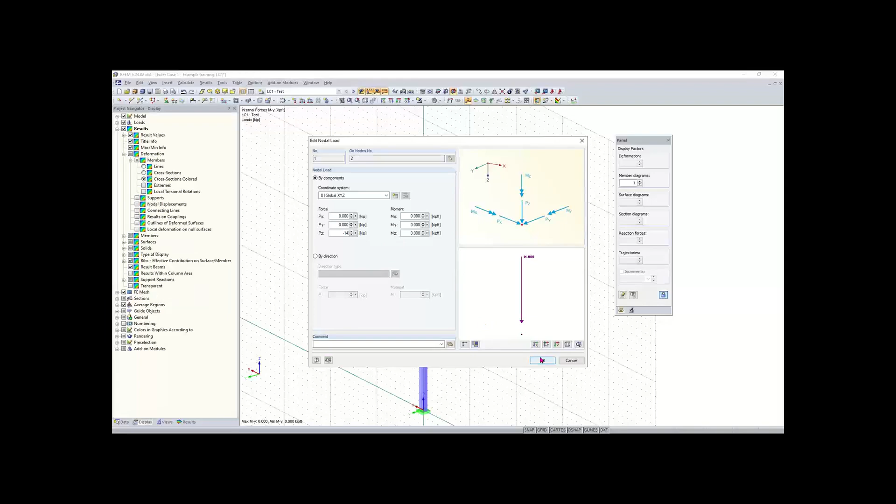So now my loading's too high. We can see that by calculating the results. Keep in mind, I also still have P-delta, or second order analysis, turned on. So you'll see an error message, calculation errors and messages. It'll say something like the stiffness matrix is singular, and explain that it's possible to calculate the critical load factors and buckling in the add-on module RF Stability.

So what we can do is close out of that, and the first thing you want to do is make sure that your load cases are being calculated based on a first order analysis. I want to change mine back to a linear analysis. Now that I've done that, I can jump back to our stability.

Within our stability, I can keep all this the same. You'll see that the load case/combination it's referring to is LC1. I'll click calculate.

And now once that's done calculating, you should see that my critical load factor here is below 1. So basically, since my critical load factor is below 1 at 0.966, that means my structure can only take about 96-97% of the loading that is applied.

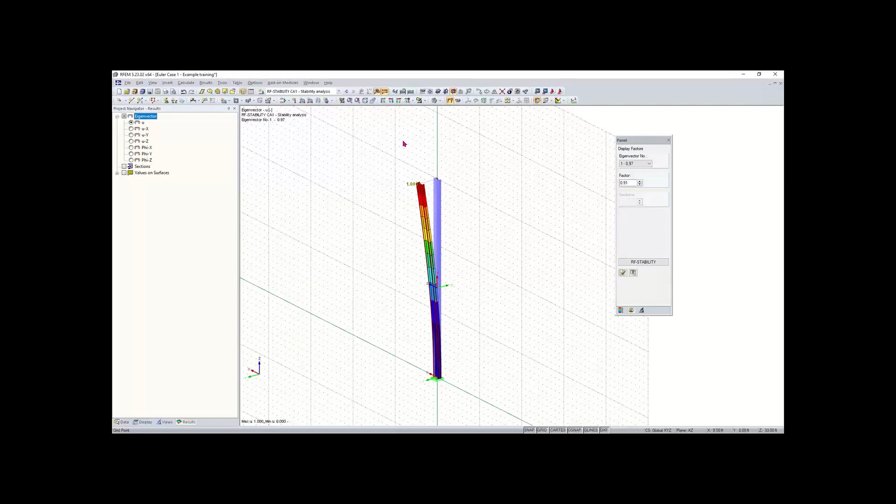So now what we can do is go back, click OK. Since our critical load factor is below 1, what we'd want to do is just decrease this loading in our LC1 up here. Again, you can select your load cases and combinations up here with this drop-down window that tells you which one you're under. And now we can move on to modeling our moment frame. So since our critical load factor was below 1, I'm going to decrease my loading to -5 kips. I'll click OK.

And now I want to change the height of our column. So if I want to change the height of this column, I can simply highlight this node here, double click on it, and then I can change the height by changing the z coordinate to 10 feet. So this will be the height of our moment frame. Actually, before we do that, let's save this model. This will be our Euler Case 1 model.

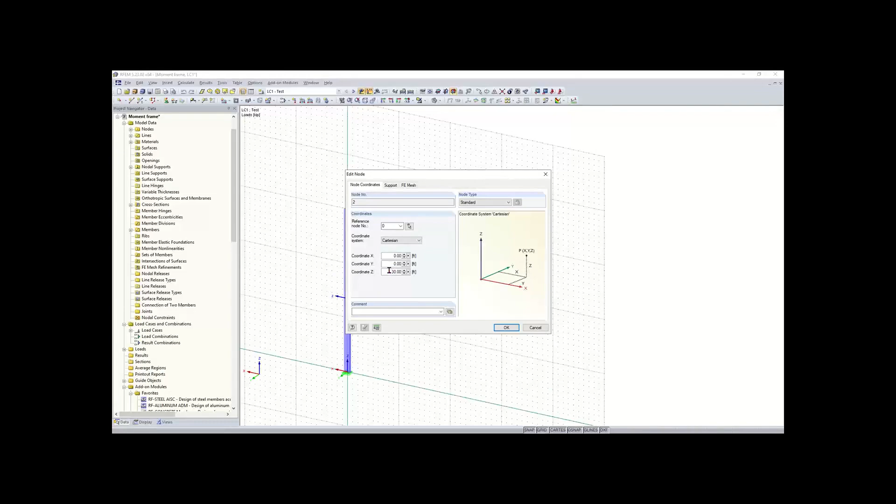And then what I want to do is go to File. I want to save a copy of this model. I can save this copy as our moment frame. And then what I can do is open that copy. And now we can turn this column into our moment frame. So I can highlight again this node here, double click on it, shrink this to 10 feet. And now I just want to make a copy of this column. So I can just highlight the whole thing, hold Control, and then simply drag this column.

Want to make that 10 feet in the negative x direction, or, yeah, so I want to make that in the positive x direction, and it's going to be 10 feet away. And then what we can do is create a beam spanning between our columns here. I can also just hold Control and, oops, I can Control Z to undo that. What I can do is just hold Control and move this loading over. And now I can draw a beam that will span between the two columns.

And this beam is going to be a W8 by 15. So I'm going to import that from our cross-section library. I'm going to go to I sections. And then I'm going to go down to 8 by 15, again leaving all these filters the same. So that'll be an 8 by 15. I'll click OK. And now we can draw our beam here, and that'll span between these two columns. And I can right click and cancel out of that.

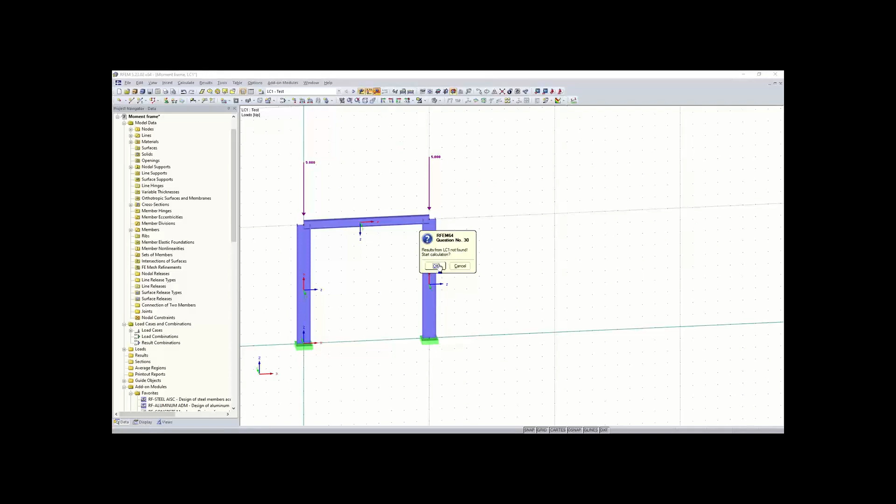And now what I can do is run my calculation. So we just turned that column into a simple moment frame. And now we can get our global deformations and see what those look like as well. We can also take a look at our internal forces by checking off members here. So we can look at the axial forces,

and then if we want to get a better idea, we can also add in some lateral forces as well. So we can add in 2 kips in the x direction for both of these and rerun our calculation.

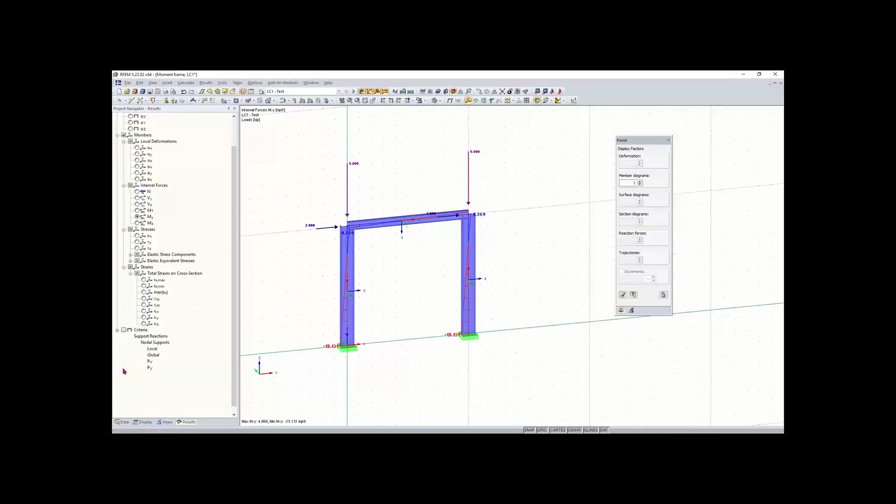So now we can get a look at our moments from our lateral loading, and then we can also go down here and we can take a look at our support reactions. So we have our support reactions here, and we can also get a look at our moment reactions as well. And those are defined based on the double arrows here.

Another good thing is you can turn off your grid as well if you just want a cleaner view of your results. You have these buttons down here to turn off your grid. And then what we can do is go to our stability, and then we can take a look at our critical load factors. So we can hit calculate. And we can see that our critical load factor is pretty high, which is good.

We can check out our eigenvectors. We can get an elevation view of that. And we can cycle through these. You can see we have some out of plane deformation, so maybe this frame will have some lateral supports, some pinned lateral supports up here to keep it in plane.

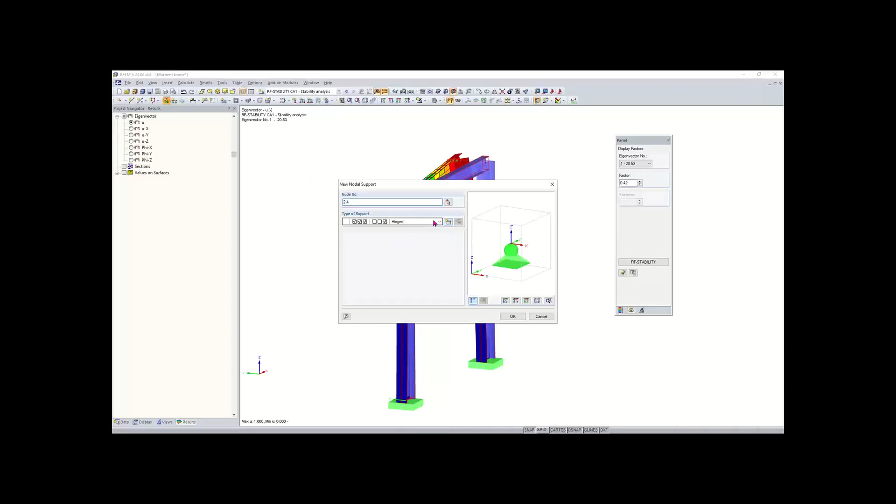So what we can do is hit new type of support. And then this support would allow it to move in the Z direction and the X direction, but keep it in plane in the Y direction. And the rotation for this pin support will be all released. We'll click OK again, and then we can hit calculate.

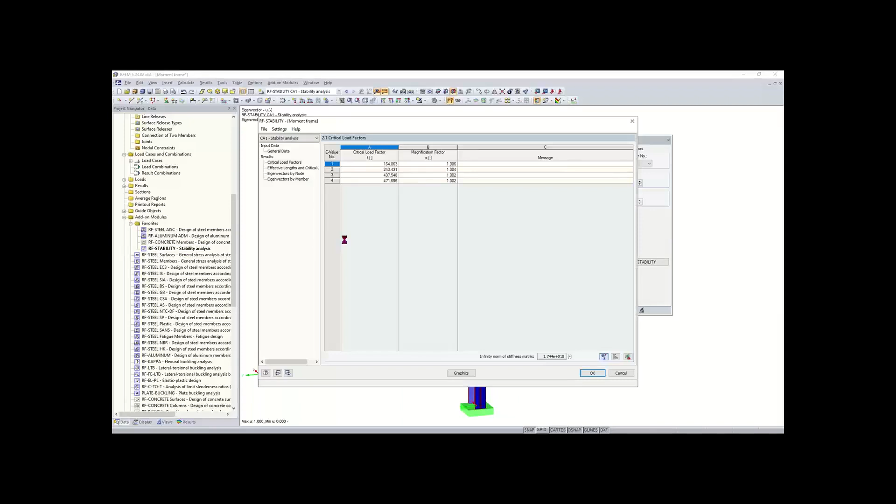And RFEM will run through these calculations again, and then we can take a look and see how our eigenvectors have changed based on the supports we added here. So you can see that we don't have any out of plane deformations at the top here. And also I'm sure our critical load factor has changed. It has increased from 20 to 164, so just adding those supports has helped a lot.

And so that's the end of the calculations and modeling for our Euler case 1 example and for our moment frame.

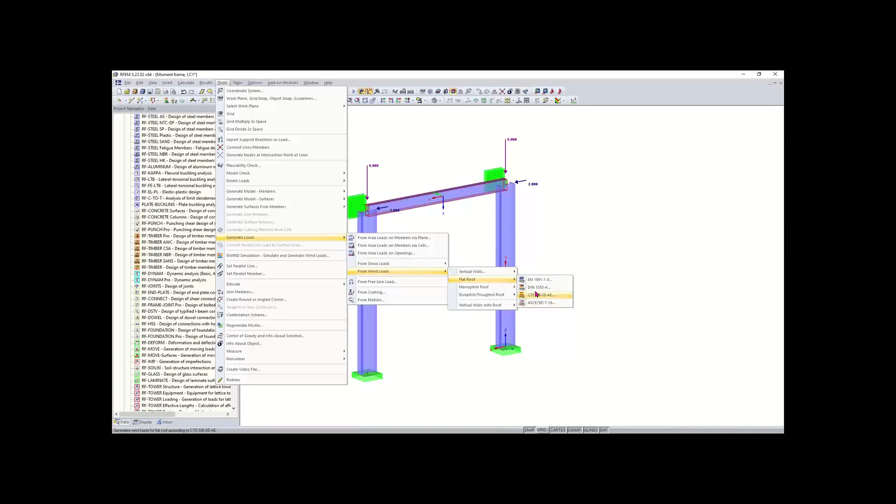Wind loads, Alex, you can show how under Tools, Generate Loads, there is the option here for wind and snow loads according to Eurocode primarily and the US codes. But these are really for general rectangular structures. So if you have anything outside of a rectangular structure, you'll need to manually apply it as we've been showing. So I think that should answer that question.

Yeah, like Amy said, those are basically for pitched roof or rectangular buildings, but you can also just create a new load case, create your wind load case and just add in your lateral loads or lateral uniform loads as well.

Good. Another quick question, going back to the beginning: when you create a new line or maybe a new member, how do you modify it if you notice your dimensions are not accurate? Yeah.

Yeah, so creating a new line, again, you can use this tool. If the dimensions are not accurate, I guess I would interpret that as the length, maybe, or if you're talking about the length is not accurate. Yeah, I think just showing how to modify node coordinates or dragging and dropping, multiple options.

Okay. So right now the cursor when you click is always going to draw the line in the grid that you have placed, the work grid, and right now mine's in the XY plane. So I'm going to draw in the XY plane. Maybe if you click and then you just want to type in your coordinates up here, you can do that, and you can just type in the coordinates you want the end of the line to go to.

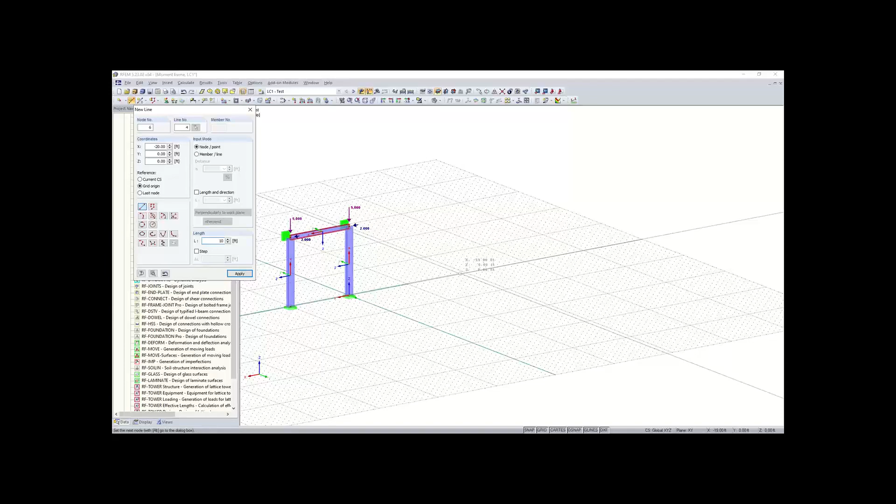Also, you can see my length is highlighted right now as 9 feet, but if I just want to type in 10 feet and I don't move my mouse at all, I can hit enter and that'll give me my magnitude in the direction I have it pointing. So those are just a couple options when doing new lines.

Another good option is to check off the length and direction here, and then I can just type in, I don't know, 10 feet, and you can see that my line will be placed perpendicular to my work plane here as well, if I click. So those are a couple options for creating new lines.

Okay. I think that answers a majority of the questions for now, and we'll just continue to ask them as they come up, or I'll answer them individually. Okay, awesome. Yep, good questions. Thank you, Amy.

So, back to the PowerPoint real quick. We'll be modeling this concrete model, and we'll just start going through this. We might not be able to finish it, but I think it goes through a lot of great methods to modeling, and good tips and everything. So we'll just go back to RFEM. And now that RFEM's up, we can simply just create a new model.

What I can do is go up to the new model button. And once I click that, again, we have our general data where I can just enter the name, concrete model. I'll just name this one concrete model training. For this model, we can keep everything the same. For this one, I would want to generate combinations automatically based on the standard.

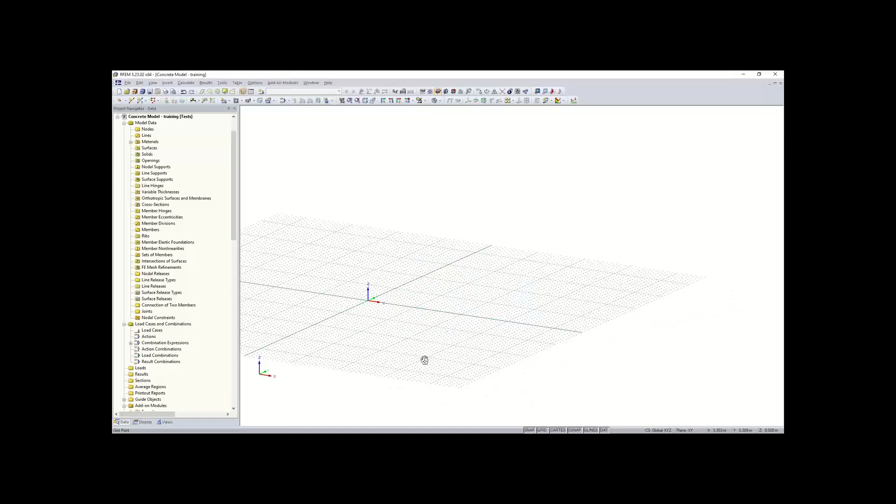So this floor slab is basically just going to be a rectangular slab. Something else that I might want to do before I get into drawing this rectangular slab is set my grid to dynamically adjust according to the size of the model. I'll just set it to that, so that changes automatically and I don't have to worry about expanding it at all. Also, my grid points are still 1 foot by 1 foot. I'm not sure if I mentioned that before, but the grid points are all spaced by 1 foot.

Actually, I'm in metric right now. I think I might have set my program to default to metric in the beginning, so let's change that. We'll go to, again, load save profile, and if you want to change the default of what your units are in, I'm going to check imperial, click OK, and then this button right here sets your default, so I'm going to set my default as imperial, click OK, and now you can see that my spacing should change to 1 foot by 1 foot. There we go.

So yeah, these grid points, you can change the spacing of them. I'm going to leave them as default as 1 foot by 1 foot. And now I can begin creating my slab, my floor slab for this building.

So I also want to turn off another option that we have in the program. If you right click, you can see this option that says auto connect line / members here. I'm going to turn that off. That's on by default. And what that does is when you have a line intersect with another line, the program will automatically separate those lines into separate members and connect them and add a node. And you'll see a better example of that when I get into creating the walls. So I'm going to go up here to new rectangular surface.

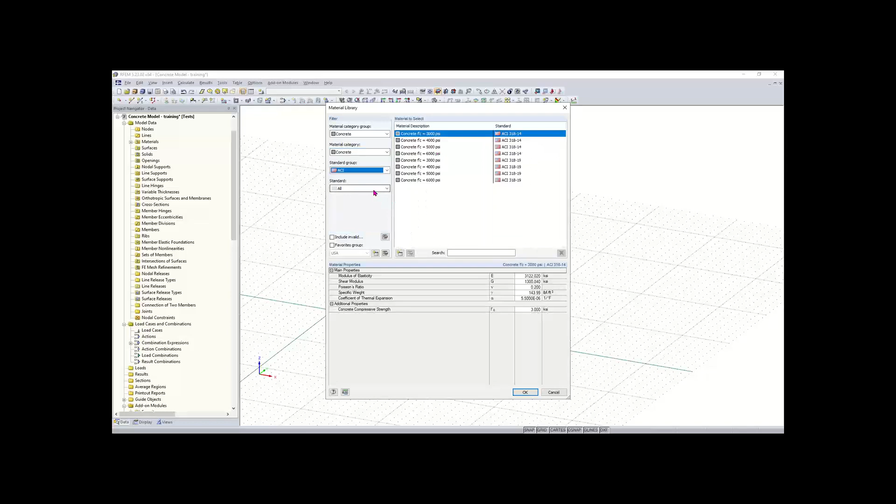And now I have my thickness here. So I'm going to make that 12 inch, or I'm actually going to keep that as 8 inches. Again, we have our materials. So I'm going to go to import material from material library. And I want to make this, again, concrete. And I'm just going to make it 4,000 PSI concrete. I'll click OK. And I'll click OK again.

And now I'll click on my origin here. And this slab is going to be 46 by 40 feet. And I'm just going to go up here and, instead of having to rotate my model, I can just hit the top-down view here, and I'm going to hit reverse in Z direction, so I'm looking from top down.

And then this is going to be 46 feet in the X direction, and then it's going to be 40 feet in the Y direction in the height. So I can move that up, 46 by 40. And I can right click anywhere or hit escape, and now you can see we have our slab here. So now that we have the slab or the floor, we can work on adding in our columns.

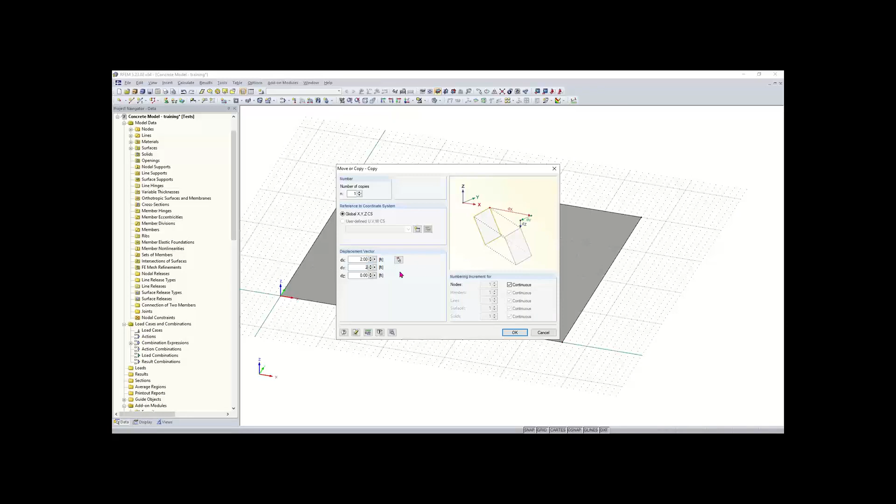So the columns are going to be perpendicular to the slab. And I think the best way to do this is to simply just highlight our corner node or our origin here. I'm going to just make a copy of this origin node, and I'm going to go to move and copy. I'm going to make one copy of that node, and then I'm going to move it 2 feet in the X direction and 2 feet in the Y direction. And now that I've entered that information, I can click OK, and you can see I made one copy 2 feet in the X and Y direction. So that'll be the placement of our first column right there in the corner.

And now I want to do the same thing for 2 more nodes. I want them to go in the X direction. I'm just going to click on that node, and I'm going to go to move and copy again, and I'm going to make 2 copies of that node. And then I only want it to go in the X direction, so I'm going to type in 16 feet, and I'm going to click OK. And now you can see I made 2 more copies in the X direction of that node, and that's again where these nodes are going to be the base of our column.

And so I want to have one more column here at the corner. This is going to be symmetrical, so we want it to be 2 feet away from this node here. And what I can simply do is just hold Control, left click, and then just move it over there. And you can see, maybe it might be hard on your side to see, but there are the grid points here that I can just snap to as well. So there we go. We have our first row of our nodes there that are going to be our columns.

And now what I'm going to have is 3 rows of columns here. So I can just rotate this model or this floor here. And then I'm going to simply just hold Control and select my nodes. And what I can do is make a copy of those. So the move and copy tool is pretty useful. So we can make 2 copies of this row of nodes and just move those 13 feet in the Y direction.

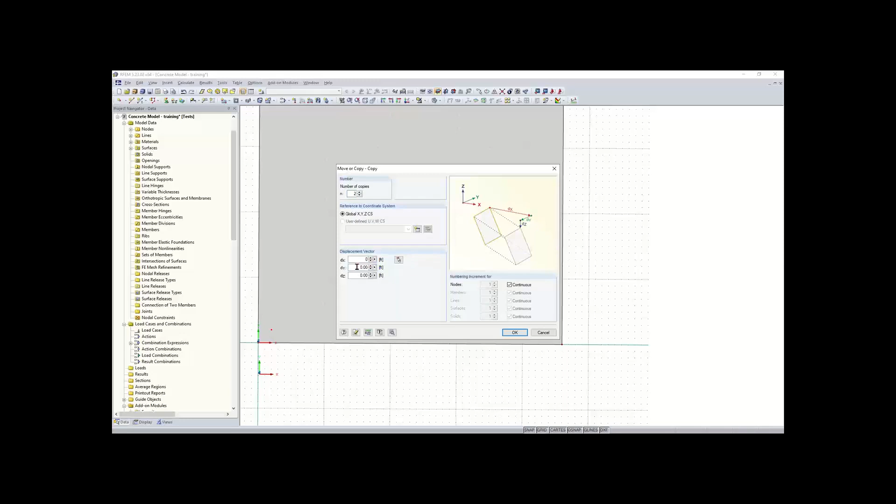I'll click OK. And now you can see that we have our additional 2 rows there. So after that, the arrangement of column nodes is right here as follows.

Something else I would like to mention is just under the display tab. Once you have a large model and it includes a lot of different nodes and lines and elements, if you go to your display tab here, you can check off numbering, and this will just give you numbers in your work window. So you can see like I have line 4 here and then different numbered nodes. So it makes it easier just to stay organized, and also for reference as well.

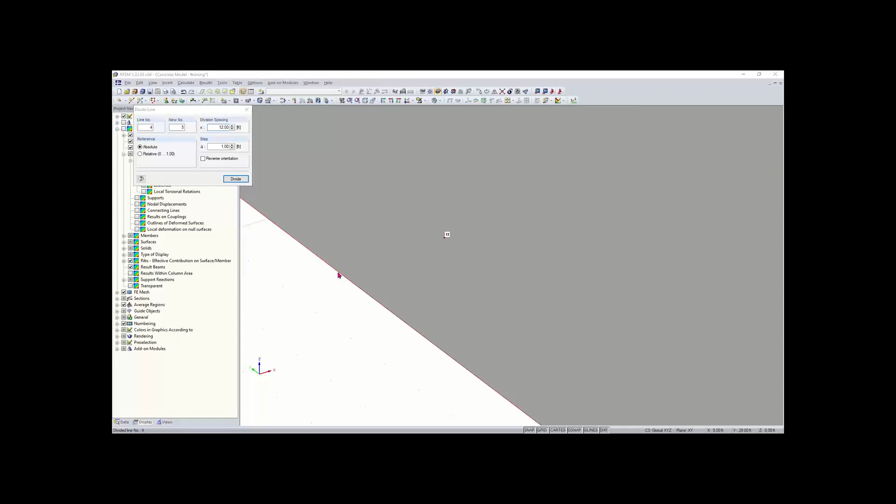So now we want to define our walls. And to do that, we can simply divide our lines here like we did with the plates earlier. So we can right click on line 4 here. And what we want to do is go to divide line and then go to graphically. And then this wall is going to be placed right next to this node here. So I'll left click and divide that line. And now you can see I'm still in the divide line tool. I can right click out of that.

And now we can do the same thing for this line up here at the top. I'm going to click on it. I'm going to right click, select divide line graphically. And maybe just to reiterate what graphically means, you can see I can just snap or place the node wherever I want to on the line graphically using my cursor. I'm going to place it right here. This is going to be 28 feet from the start. So I'll place that, and now you can see that we have 2 lines now with the node there placed at 28 feet from the start.

And also again, if you're confused about the orientation of your line, you can see the arrow here. When you hover over your line, this red arrow tells you the direction.

Now we can move on to creating our semicircle surface, which is going to be used for our spiral staircase over here. We can go up here to new rectangular surface. And instead of clicking this, we can hit this drop down button here. And you can see we have a list of different shaped surfaces, along with being able to do a polygon, or you can select the boundary lines of something and create a surface as well if you don't see the shape here. And what we want is semicircle. Similar dialog box, everything here is fine.

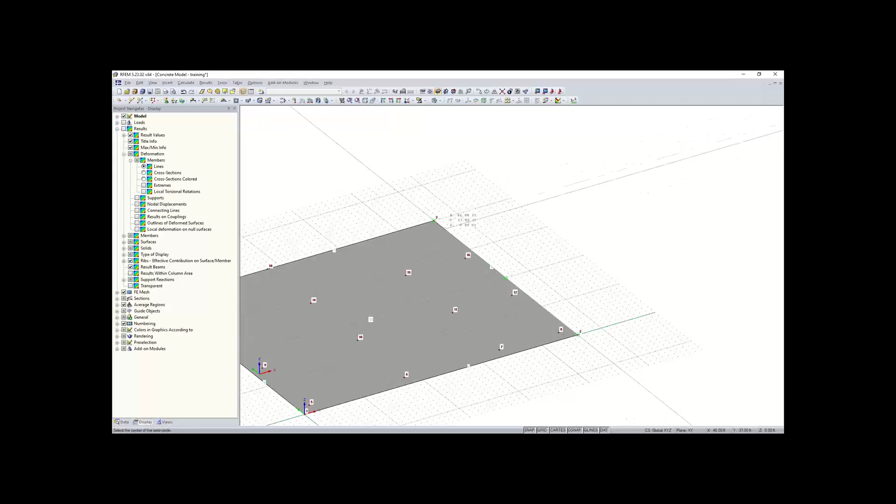We can keep that. And now I can just simply draw what is going to be the radius of the semicircle. So the radius is going to be 7 feet. So I'll start at node 3 here at the corner. Actually, that's not where I want to start. I want to start 7 feet away from that node because you start from the center. So it's going to be 7 feet. That'll be at 4640. Or my mistake, that'll be at 4633. So we'll start at 4633, draw this so the radius is 7 feet, and we'll end it at the corner there. And now you can see we have our semicircle surface here attached to our rectangular.

And so now, after surface 2 has been created, we can work on our ceiling slab. And this should be pretty easy since our ceiling slab is going to be symmetrical, or basically the same as our floor slab. What we can do is highlight our floor here, and then we're going to move and copy it. And something to keep in mind is that there's going to be a clear height. So for example for this concrete building, there's a clear height of 11 feet between these 2 slabs, between the floor slab and the ceiling slab.

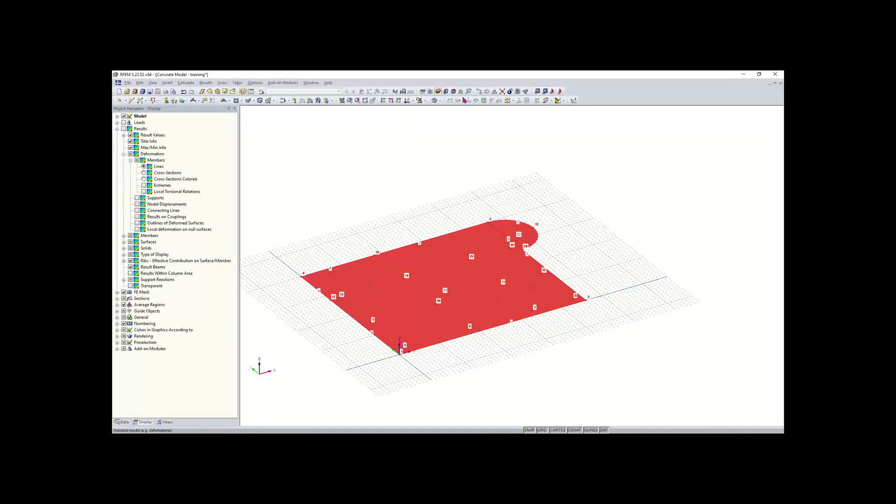And we also want to take into consideration the thickness of these slabs. So what we are going to do is take half the thickness of each slab and then add that to our 11 feet. So we take into consideration the thickness, and that's going to be 11.83 feet in the Z direction, and we're only going to make 1 copy. We'll click OK. And now our ceiling slab is created, which is not the correct height. So to change that, I can Control Z.

I'm going to redo that. Move copy. Oh, I typed in 1.83. That makes sense, so 11.83 is what we want. And now our ceiling slab is created with the correct distance between them.

The next thing we want to do is check out some different views. If we click on isometric, we get our isometric view. Maybe we want a different perspective, so we can check our perspective view, then look at the reverse in the Z direction. If we didn't have perspective view on, we wouldn't be able to see that there's two slabs here. So if you turn that on, you can get a better look at elements that are lying on top of each other.

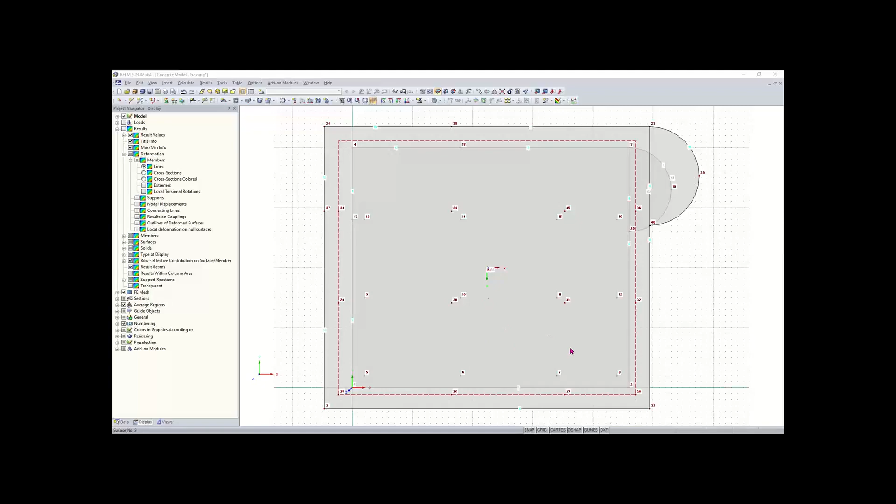Now we want to create the walls between these two slabs. So to do that, we're first going to merge these two surfaces here.

What I want to do is divide this line here. So I'm going to right click on line 16, and then divide it, dividing it by distance, right in the middle.

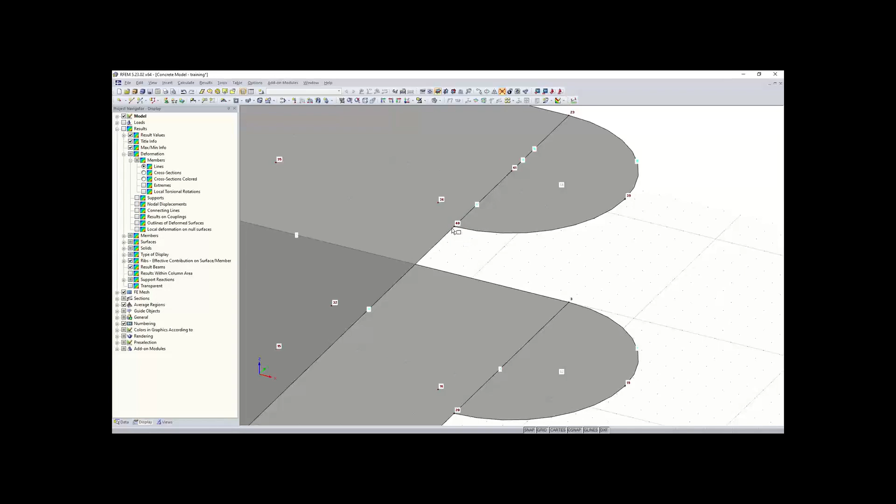Now that it's divided in the middle, we have two different lines, 16 and 17. So now if I want to connect this line to this line at node 40, you can see that this line is one whole line. If I go up to this tool called connect line/members, I'll click on that and highlight my node there. You can see that split the line at that node and connected them, creating two different lines and an intersection.

So now we can delete the surface, our top surface here for the ceiling. We'll select the two surfaces by holding Control, then delete.

The reason I did this was so that we can delete these two lines, 16 and 17. I have two lines lying on top of each other, so I'm going to delete 16, 17, and 18, just by clicking on them and hitting delete.

We can also delete those lines by going to the project navigator. If I wanted to delete these lines, I could go to data, then lines, and hold shift to select 16, 17, and 18, and hit delete. Now we're just left with this outer boundary line and node 40 here.

So now what I want to do is recreate the surface by going up to my surface tool, hit this drop down, and select boundary lines. This is pretty easy, even though this is a very abnormal shape here.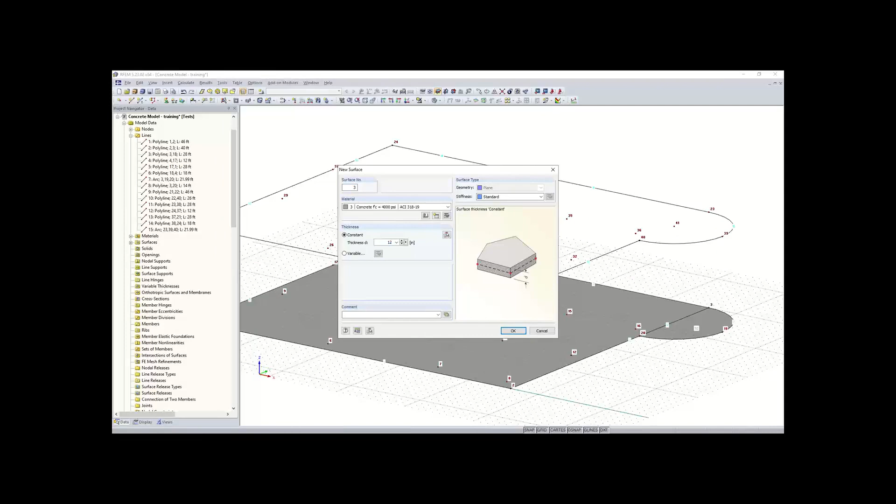I want my ceiling to have a thickness of 12 inches. Everything else is good here. All I need to do is select this boundary line, and you can see the surface has been generated based on that boundary line. We also kept node 40 here, which is very important.

Because now what we want to do is add in an opening right here for our spiral staircase, and we can use node 40 as the center of that opening. So I'll go up here to right next to the surfaces tool, we have an opening tool. Right now it's set to new rectangular opening by default, but if I click on the arrow next to it, I get my options for other openings.

So I want a circular opening. Now I can just click on node 40 and automatically the circular opening will be set. Right now my selecting this graphically is a little bit crazy.

So what I can do is go up here to this window I have open, select step, and make the step just 1 foot. Now you can see I can create my opening, and each time I move my mouse it's just 1 foot. Then I can also type in the radius of this opening, which will be 6 feet, and hit enter.

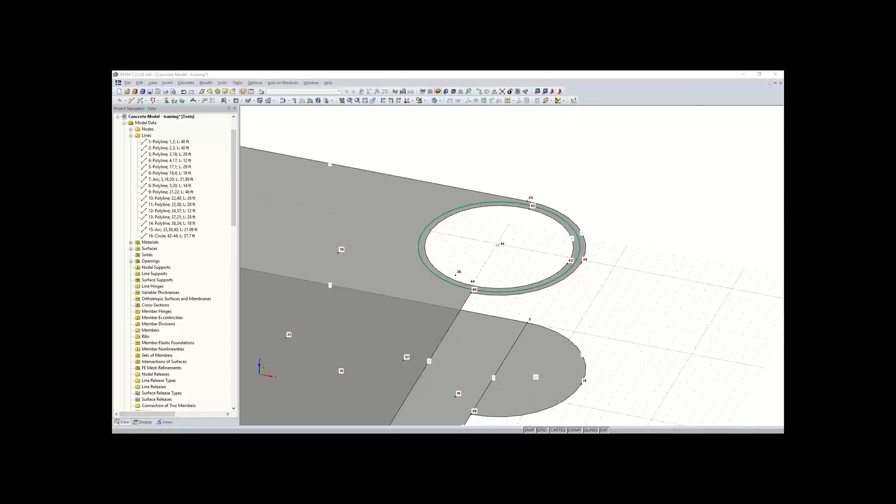You'll see that RFEM automatically integrates that opening into the surface and gives us a nice symbol for our opening as well. I'll hit escape and that tool will close out. Now we can get into defining our walls. So maybe I'll go back to an isometric view, and rotate the model so the staircase is in front of me.

Now what I want to do is create some new lines, and I also need to create some new nodes here on this line. Actually, I don't need to create a new node there. I can just go up here to new line.

Basically what I'm doing is connecting the floor to the ceiling with this line, which will act as our wall boundary. This is going to be about 7 feet away from node 20 here, so that will be at 4619.

We'll draw up to the line, and you get that nice snap symbol there for perpendicular, kind of like AutoCAD. Now that line's there, it's perpendicular, and now we just want to create some other lines for our boundary, for our walls.

The next one will be 12 feet away from node 3, so we'll go over to 3440. That will be right here. Now I can go up to my line tool, get that nice perpendicular symbol, and now we have those 2 lines for our walls.

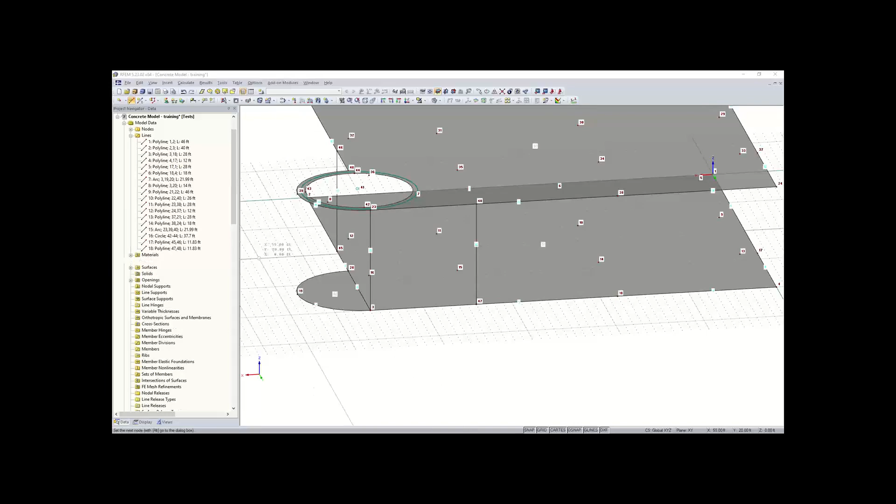Now we can simply connect the rest of our nodes here, like 3 and 23, 20 and 40, and 4 and 24.

Oops, looks like I created a line there. Control Z. I can go back up to new line and just connect 4 and 24.

We also want to connect 18 and 38, and also 17 and 37. Again, these are just creating our boundaries for our walls.

So now we have our lines here, but one last thing we want to do is connect all these lines and split them at their connections. We can go up to connect lines or members, highlight the whole model, and that will split our lines at those intersections. I'll right click out of that.

Something else to note: alternatively, since we turned off auto connect line/members in the beginning, if you're drawing your line and want it to split at the intersection, you can go to detail settings and select auto connect line/members if they contact under your line drawing settings. You can keep that on if you want.

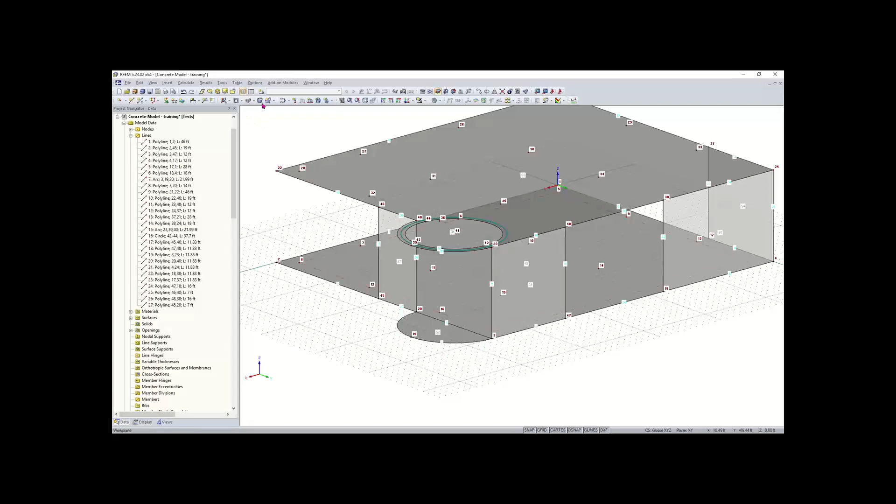Then we need to create the wall for our staircase. Since this is not in plane, or it's out of plane, this needs to be a quadrangle. So we'll go up to this tool called New Quadrangle Surface, with a thickness of 8 inches. We'll click OK, and then basically select boundary lines like before, and now our quadrangle surface is created there.

Let's see, next we created our walls. The last wall we want to create is our inner wall here.

I'll go up to rectangular, and now I can just create a wall here for our inner wall, going up to node 34. That did not create correctly, so let's see.

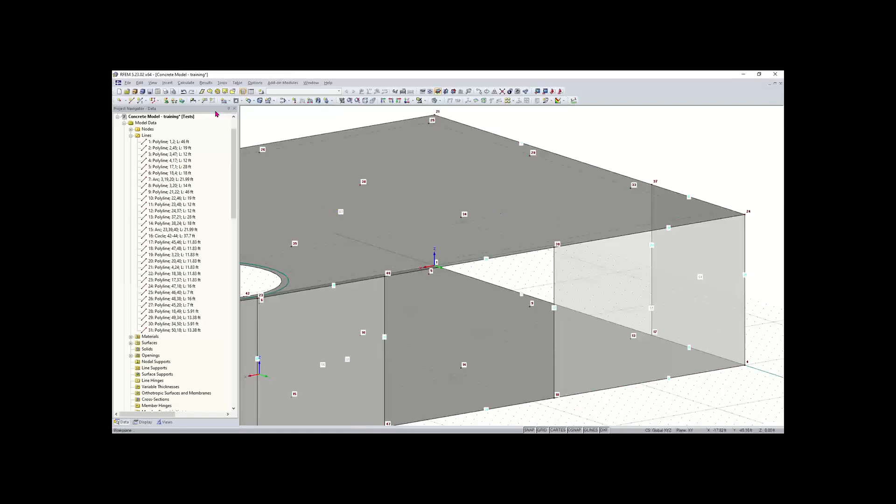We want to go back, Control Z, and make sure our work plane is in this plane—this would be the YZ plane. So we'll go up to YZ. Again, you have your work plane options up here to change the work plane of your grid. Then we can also change the origin.

There's a button called Set Origin of Grid/Work Plane. We can click on that, and then I can set the origin to node 18 here. Now I can draw that rectangular surface correctly. I'll click OK, then select node 18 and node 34, and now you can see that my wall was created.

After that, we want to now create our columns. So I can set my work plane back to the XY plane. And then I'm just going to connect these nodes that we created in the beginning with a line.

I'll pick node 5 and 25. Then what you can do is turn lines into members by double clicking on them, then going to the member tab, and then available. Once you hit available, it's going to ask what cross section you want this defined as, so go to import cross section library.

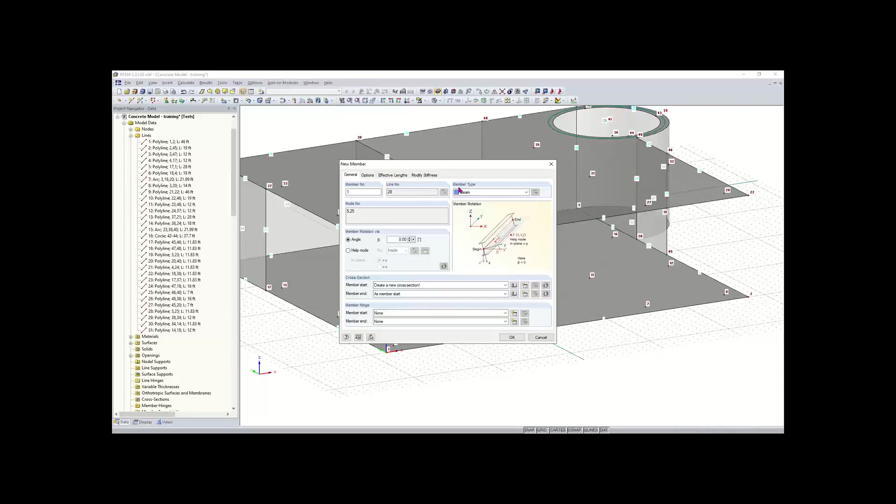This is going to be a rectangular parametric concrete massive section, and the dimensions of this are going to be 14 inches by 14 inches.

Again, our material set here at the bottom looks like it's by the older standard by default, so let's go to import material library and make this for the newer standard. We'll click OK, so we have our concrete 4000 psi. We'll hit OK again, and then we'll just keep hitting OK through these dialog boxes.

Now you can see that my member here, my concrete column, that line that I connected those two nodes has been created or transferred into a column that we defined.

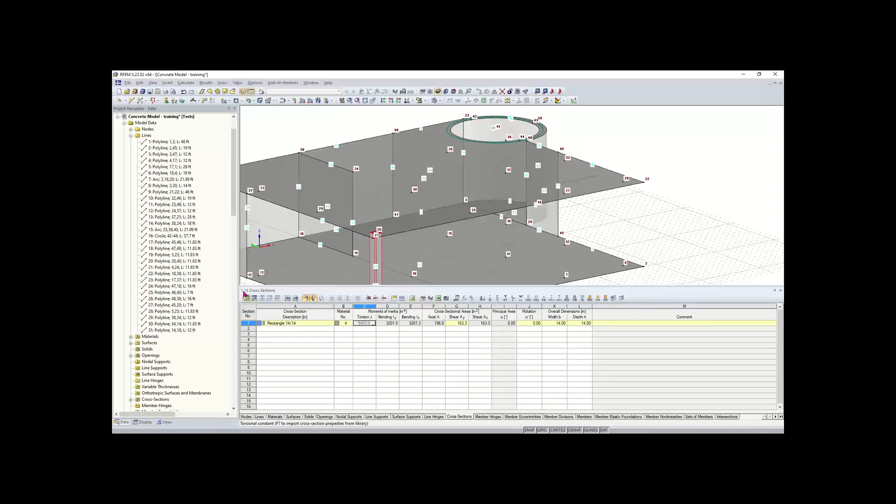You can also see this in the table. So if I turn on my table up here, maybe we want to get a look at our cross sections in our table. So we can go open our table, go to members, and we can also go to cross sections. Under the cross sections tab here, you can see we have our cross section listed, and we can also change this cross section from here if you'd like. You can also see up here what table you're in if you need to reference it - it's 1.13 cross sections.

So I will close out of my table, and now we want to create the rest of these columns. Instead of having to manually do that, we can simply use the tool, highlight, then hold Control, and then drag. You can see that we'll just create a copy. And there you go - now we have our first row of columns there.

Another way of selecting columns is going up to the special select option here, called the special select tool. What this does is allow you to select elements within your model based on these categories here. So let's say I want to select members - I can activate that, and activate all members, or select based on various options here based on material, type, number.

We want to select based on cross section if we want to select all of our columns here, and we can select based on the 14 by 14 cross section. I'll click OK, and now you can see that all of those cross sections have been selected. This is handy because now I can easily hold Control - all those are selected - so I can just hold Control, drag, and drop. Now all of my second row of columns is created.

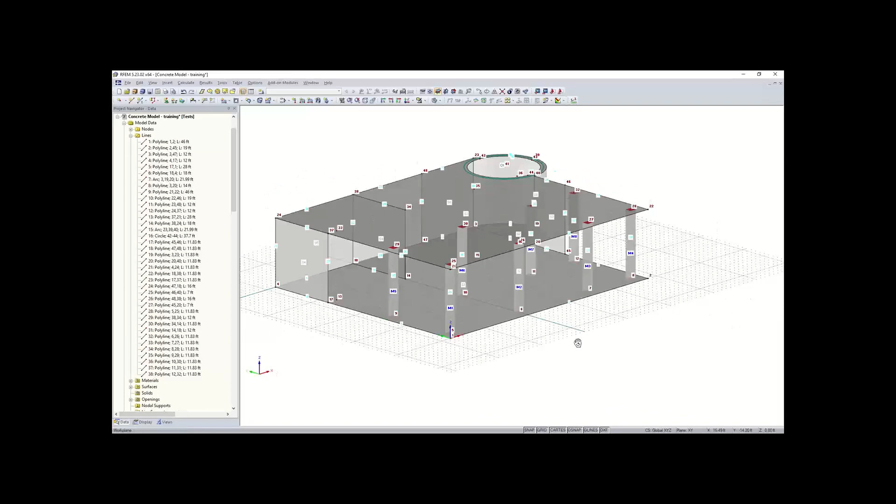Finally, now we can just do one more column. We can select a random one, hold Control, and connect 15 and 35 to the floor and ceiling there.

So the last thing we need to do for our model data is just add in this downstand beam. There will be a downstand beam from the edge of this wall here, node 37, all the way to this column, node 35. This node 33 here is not needed, so I'll select that and delete it.

And to add in this beam, I can simply just repeat what I did for the column. I can use a line, or I could just simply go to new single member.

And then I can, under new single member, for this downstand beam, it's going to be a rib type. So I'll click on rib. And then for the rib type, I want to go to edit member type. There's an edit button right next to the type there. And we want to select the option on the positive Z, local Z side of the surface. And you can see that's under position and alignment.

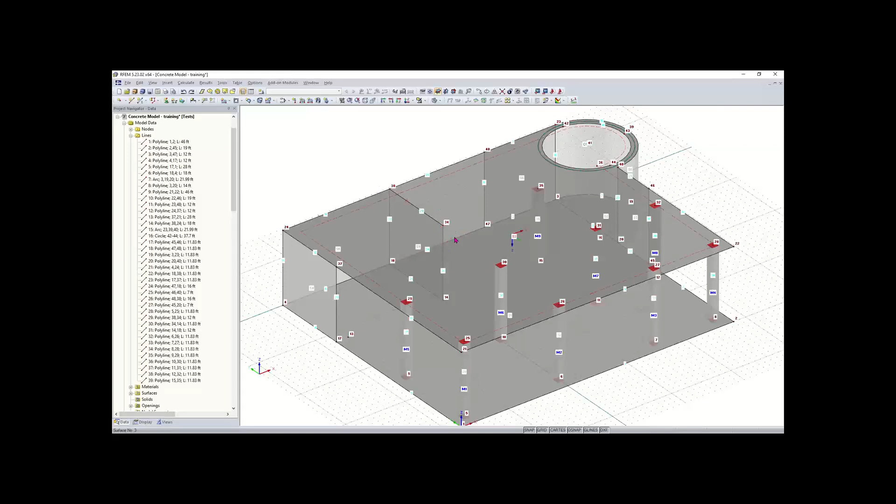Oops. Now we can draw our rib, which is not correct there. Oh, I see. Okay, so what I can do is just exit out of that tool, go to new member, click OK. Need to redefine these. It's all good. And now it's asking me for the line. So I will have to create the line.

And I'll connect the wall to the center wall there, and then to the column. And I'll go back to my new members, click OK. And then I'll click OK again. Everything's defined here correctly. And then I'll select this line here. And now we have our downstand beam. So now that that's defined,

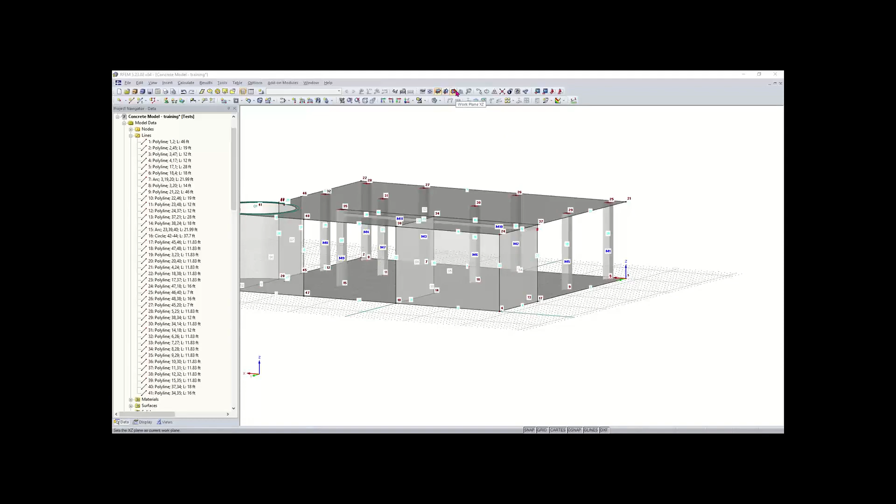the next thing we want to do is add in an opening to our back wall here. So what we can do is we can go up here to our openings, rectangular, and then before we draw this opening, we need to make sure our work plane and origin is set in the correct orientation and position. So this work plane is going to be in the XZ plane. And then the origin is going to be at the corner here.

And now we can draw our rectangular opening. And that's going to start at the top left here at 1408. The coordinates, 1408. We can snap to grid points right here. And then we can just simply draw that. And that's going to end 503 right there. And now our opening has been created, our back window there.

And the next thing to do is to add in supports for the structure. So all of the surfaces and all the model data there is created. We just need to add in the supports. And so the supports are going to consist of line supports. So we're going to assume that the foundation over here on this left-hand side is adjacent to another building. So we'll add in line supports there.

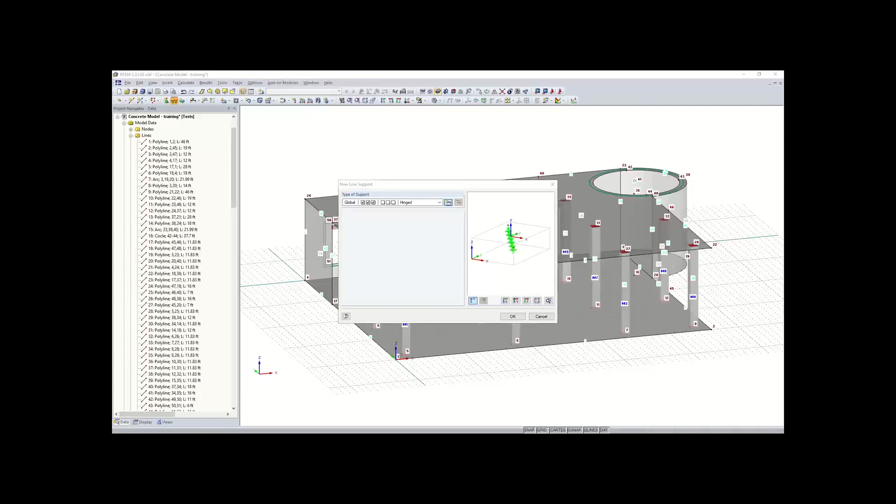And we'll go to new line support, create a new type of line support. And the only thing we want to be fixed with this line support is the translation in the Z direction. So all of these will be released. The translation in the X and Y will be released. Rotation will be released. The only thing we want is just support in the vertical direction. So we'll click OK. And again, and then I can just simply select my lines here and add in that line support.

So the next type of support we want to add is a surface support, and this will be the foundation for our floor slab for surfaces 1 and 2. So I can just select surfaces 1 and 2 and go up here to new surface support. And within here we can define our surface support.

So we can just simply create this foundation basically. So within the Y translation and the X translation, we're going to have a spring constant of 64 kip per cubic feet. And then in the vertical direction, we will have a spring constant of 640 kip per cubic feet. Well, Y and X are going to represent the shear capacities of the surface, and then the Z is going to represent the soil.